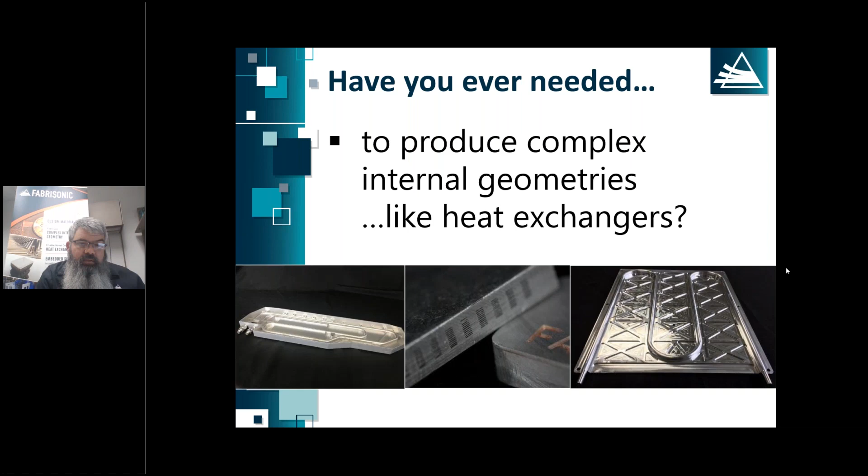There we go. The second thing that we do well is embedding electronics. Ultrasonic additive is different from many traditional 3D printing processes in that we don't take a metal like a powder or a wire and melt that. We're actually taking thin metal foils. The foils are on the range of about 5/1000ths of an inch, and we weld those together at room temperature using a process called ultrasonic welding.

Ultrasonic welding is not a new idea. It's been around since the 1960s. Early on, it was called wire bonding in the electronics industry. What we've done is taken that 1960s technology that used maybe 50 watts of power to weld small wires in electronics, and we've scaled that up to about 10,000 watts so that we can weld thin films layer by layer to produce three-dimensional shapes. The beauty of using ultrasound is it's a solid state process.

That means there's absolutely no melting. In fact, most of the parts that you're going to see throughout the presentation today never got above, say, 200F. So the lowest setting on your oven at home, that's as hot as these parts ever get, and only for a very short time. At any given point in a 3D build, we're only seeing that temperature for, say, 100 to 200 milliseconds as the welding device is rolling over the surface. Because of this low temperature, it allows us to embed pretty much anything in solid metal parts.

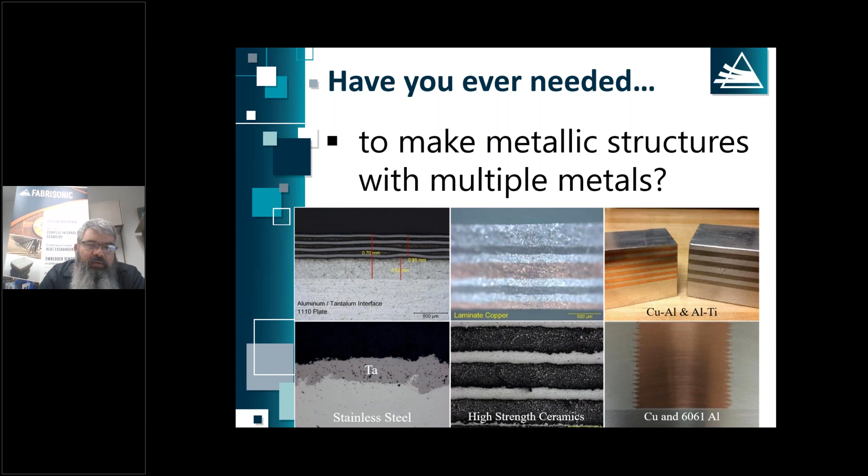If you can name a fiber, we've probably embedded it for someone. Carbon fibers, basalt fibers, S-glass, you name it, it's probably been embedded. But the idea is to make a metal matrix composite. And just like any polymer-based composite, we can play games, 0, 30, -30 to build strong laminate structures. So those are some of the highlights of what the process really excels at.

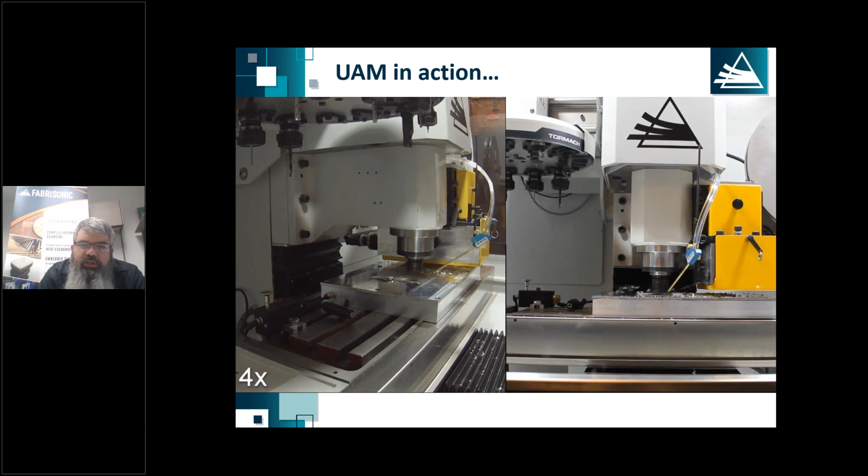Now I'll show you a little video of the process in action. As I mentioned, all of our systems start off as a CNC mill. Here we're milling away some material. And in our process, a majority of the time, we're starting with some pre-existing feedstock. We don't necessarily have to print the entire part. Customers bring us castings, customers bring us weldments, and we start printing from the feature that requires 3D printing.

So we may only print 30 or 40% of the part, but that saves us time as 3D printing is kind of slow and expensive. Printing just the portions that need 3D printing really helps speed things up. Now, underneath that yellow box, you see a little cylinder rolling. That cylinder is actually the welding device, and I'll explain that in more detail later.

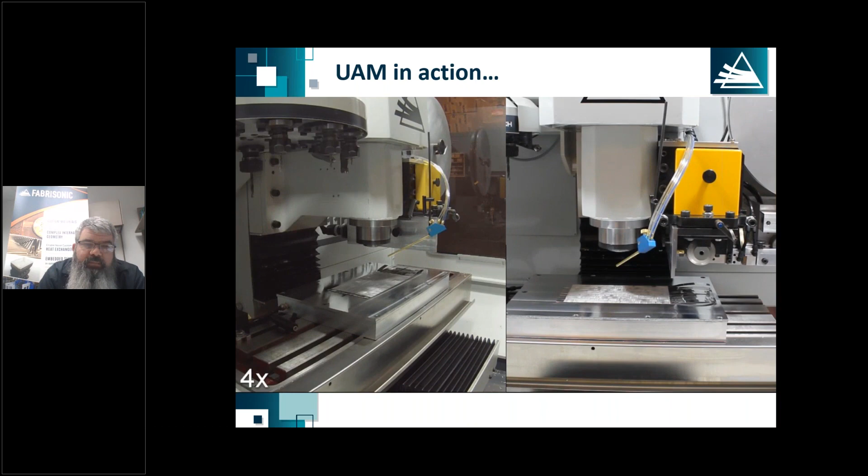But as that roller is rolling over a thin film of foil, again on the range of 5 to 10 thousandths of an inch thick, it's welding down that metal foil, fully dense, 100% metallurgically bonded metal. We repeat this welding over and over again. Again, we print near net shape, so we're printing kind of boxy structures that are close to the shape we want. And we derive all of our geometry specifically from the CNC milling. So from time to time, we'll stop, switch over to the mill to create the geometry as we build up layer by layer.

Again, all of the UAM systems are based off of a CNC mill. So we can choose different size mills depending on the product that we're trying to build. Our largest system right now in-house is about 6 foot by 6 foot build envelope by about 3 foot. So we can make some fairly large parts. We've had some customers that have put our welding devices on other motion systems like robots, fiber placement machines. So the scale of the process can be quite large.

From a deposition rate, when you look at some of the powder-based processes, you hear numbers of say 1 to 4 cubic inches an hour of volume. We're printing more on the order of 40 cubic inches an hour. So it's a little bit faster, but we would never call it fast. It is still a fairly slow process.

Again, for many of our parts, we'll start with something that's already existing and add material to it, to kind of leverage that ability without having to spend the money to print the entire part. And again, most of our machines are CNC mills and typically 3-axis, although we've done a few customs that have a few more axes to them.

So a little bit on how the process actually functions. Again, the idea of using ultrasound to weld metals is not new, derived in the 1960s from some electronics, wire bonding they called it. What we have is an ultrasonic horn, that's on the left-hand side here. And that is an acoustically tuned device that's meant to vibrate specifically at, in this case, 20 kilohertz.

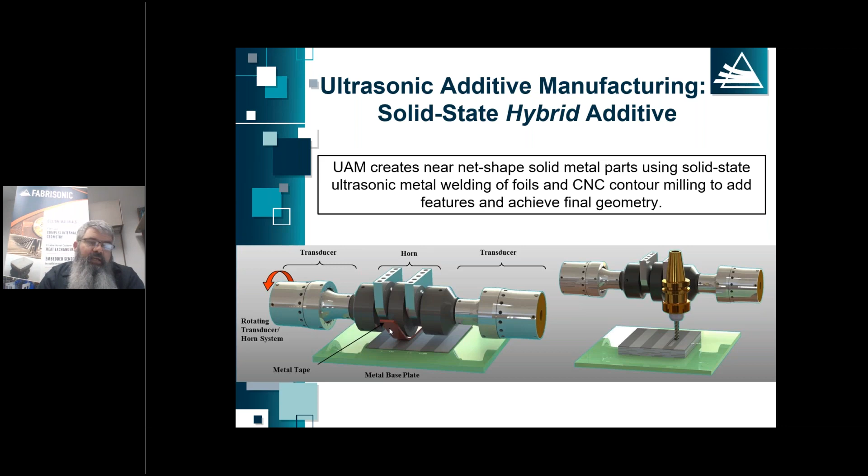On the right-hand side, we have depicted a CNC mill. Again, from time to time, we can come in with the mill and create both the internal and the external geometry. Pretty much every surface in an ultrasonic part is going to be touched by a mill.

A little more detail on the bonding mechanism. We get a lot of questions about this. It's akin to other solid state welding processes such as friction welding and explosion welding. But the general idea is metals like to stick to other metals. But down here on Earth, all of our metals are covered with an oxide layer. So if we take two pieces of metal and slam them together, what we're really doing is slamming together two thin layers of oxide.

The idea with an ultrasonic bond is to remove that oxide. So we're taking that welding horn, vibrating it left to right, and that's scrubbing the microscopic ridges and valleys on those metals. It turns out that most metal oxides are very, very brittle. So that scrubbing motion basically grinds away the oxide layer, kicks it out the side, and we have virgin metal on virgin metal. We apply a little bit of pressure, a little bit of force, pushing those asperities together, and we get a solid state bond.

Now, certainly there's more to it than that, but that's the general idea. We're scrubbing to get rid of both the oxides and any contaminants. That exposes virgin metal on virgin metal, allowing us to get a solid state bond.

To build up a three-dimensional shape, we take these thin metal foils or thin metal strips, and we lay them up kind of like in a bricklaying pattern. Certainly, we don't have to do that. It's kind of a belt and suspenders approach to make sure that if we lay a tape in the wrong place, our bond lines aren't all in a vertical seam. We lay those up in a bricklaying pattern to build up a solid three-dimensional shape. Again, all of the geometry is going to be derived finally from CNC milling. So we're printing close to the shape that we want, and then milling to the final shape.

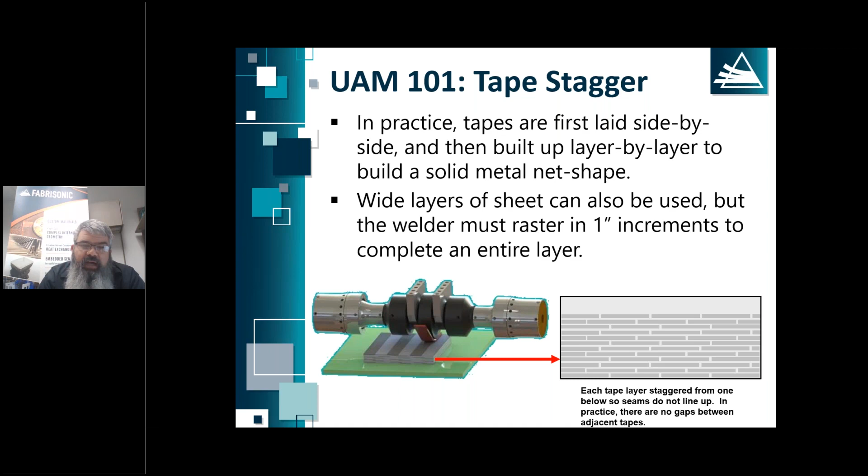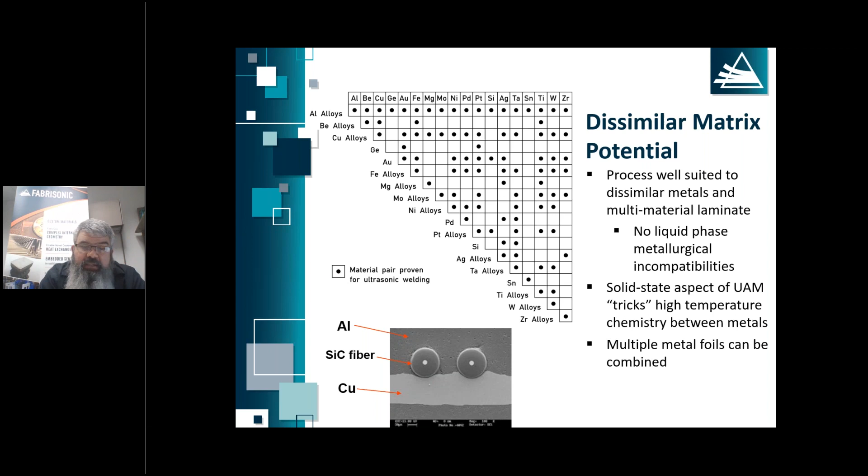So the welding process works very well to weld metals to metals, but it does not weld metals to non-metals. So anytime we're working with some sort of non-metallic, we're going to embed that. And when I mean embed it, these fibers were actually just laid on top of the copper and we welded an aluminum layer on top. And you can see we've extruded metal all around those fibers. Under a high power ultrasonic field, metal flows very easily, so we can extrude metal around things that we're embedding.

Looking at more along the lines of custom materials, we see some gradients here. The titanium aluminum gradient is heavier in aluminum on the top and heavier in titanium on the bottom. And this was actually designed as an armor product. So we're engineering a material with a variation in the material properties through thickness.

Below that on the left, we have copper and stainless steel. A lot of the thermal problems that we get involved with involve copper to wick heat away, but a lot of those devices tend to be stainless steel. So the ability to mix stainless and copper kind of at will in a design to wick heat away is important. In the center two images, we have aluminum combined with Invar and aluminum combined with moly.

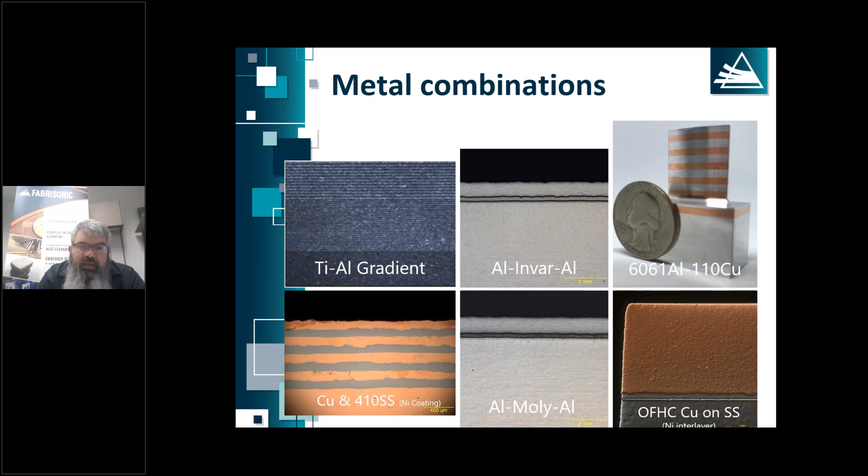So there's a wide array of materials that can be engineered by 3D printing to get the exact properties exactly where you need them. We've done variations in modulus, variations in CTE, variations in thermal conductivity, all within the same part.

And just like any other composites, metal matrix composites built this way follow the rule of mixtures. So we can easily calculate performance based on traditional composite theory. The only thing is our matrix of aluminum is 45 KSI and our fibers are maybe 200, 250 KSI. So you can make some fairly high performance materials.

So we talked about embedding of sensors into solid parts. And again, I'd say this is a large application space for the UAM technique. Typically, we're trying to do either health monitoring, or if we aren't doing health monitoring, we're probably trying to calibrate someone's model. By being able to get data in a very specific location and feed that back, we can calibrate people's models. All the models kind of have an analytical equation with three unknowns at the end.

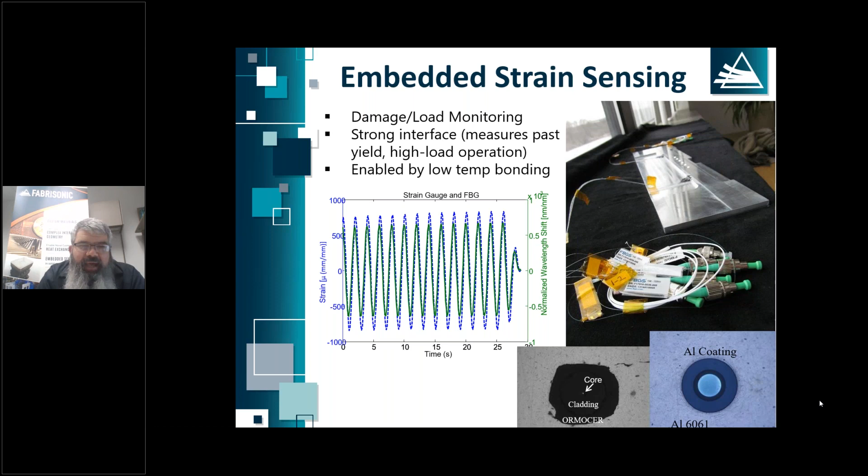We find that we can typically hold good high quality data till 2 or 3% past yield of the underlying base material. So you can get data past yield, but certainly there are limits.

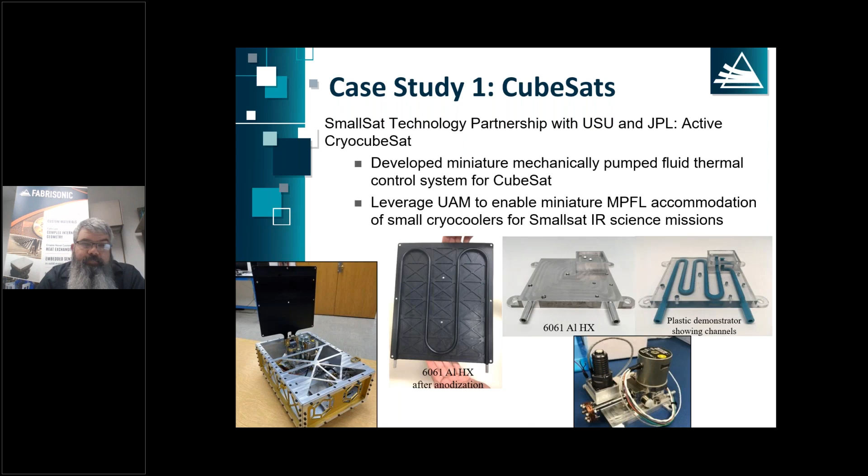Just to show you an idea of how this type of part is made, this is a separate cold plate, but it's the same general idea. For the most part, we're starting off with a piece of billet. Again, we only 3D print those features that need it. We print a little bit of material just to get our process established. Then we go in and mill the internal channels. Now, this doesn't have to be a single layer of milling, but in this particular example, we have one layer.

Like all other 3D printing processes, we have a need for support. When we're welding, we're pushing down with a fairly high amount of force. So any channels wider than, say, about 1/4 of an inch, we're going to fill those channels with a water-soluble support material that's patent pending with Fabrisonic.

We then mill that to get a nice, flat, even surface. And then we continue to print metal foils layer by layer over top of those channels to fully encapsulate those. When we get done with all of our printing, we come in with the mill to get the exact geometry, in this case, an isogrid that we're looking for on the outside of the part.

Just to give you kind of a range, these parts here were helium leak check tested down to 10⁻⁹ standard cc's a second of helium. So that's kind of space flight qualification numbers. Burst pressure tests on these parts were about 3,000 PSI, and operating, I think, was only about 200, 300 PSI.

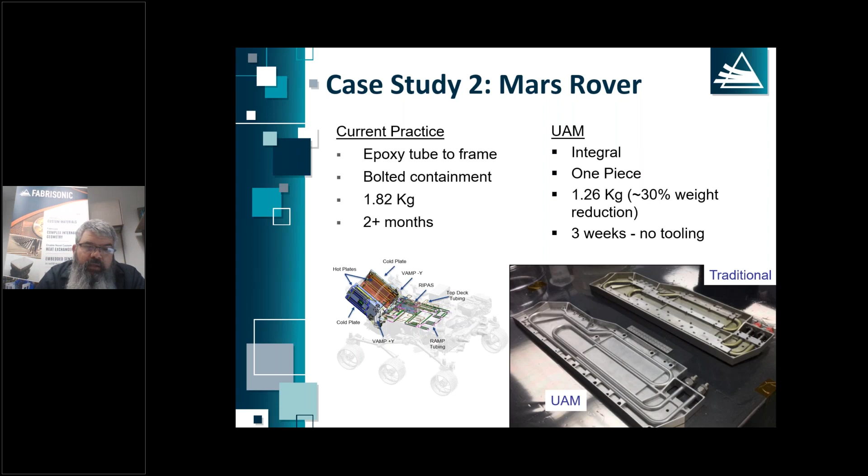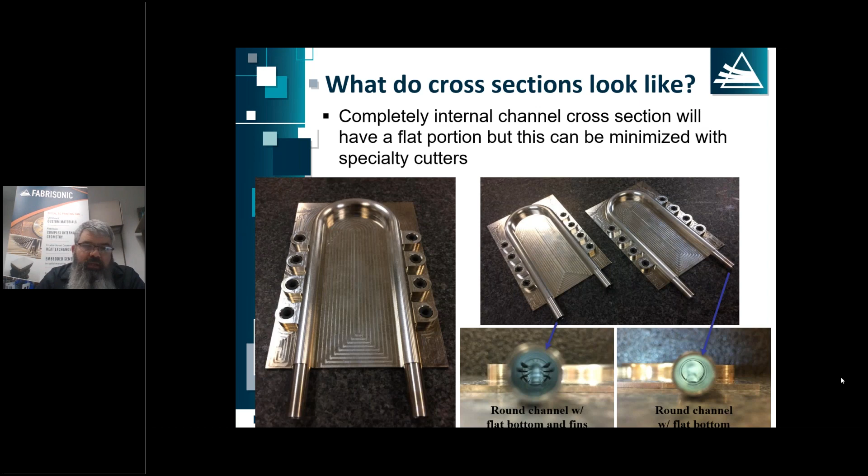So from a design perspective, there's always things that can be done to change cross-sectional areas, insert fins, insert turbulators, all those type of activities that people might be doing with other processes can be done just via CNC milling as opposed to some sort of powder-based printing.

Another area we do a lot of work in is larger heat exchangers. Here we have pictures of a heat exchanger that's about 5 foot in length. We've done some larger ones that we can't show. And I would say, one area of real interest for us right now is combining additive processes.

So a powder bed system may be great for making organic bone-looking structures that are really good right at a place where you're trying to pull heat out for getting really high surface areas in something like a vapor chamber. We've combined powder bed processes to create those very fine structures that really aren't a sweet spot for ultrasonic additive. We've printed those on powder bed and then used UAM to embed those in much larger heat exchangers. So I guess the idea I'd leave with you is we don't have to print all of one part with one process.

We're doing work where we're combining UAM with DED processes, with powder bed processes, as well as cold spray processes. And it's really about using the right tool for the right feature. I think 10 years from now, just like we have a mill, a drill press, a lathe, you're going to have an arc DED with a powder bed with a UAM system, and you're going to use those processes that are best for a particular feature, combine those to make a complex 3D printed part. But I'll get off my soapbox.

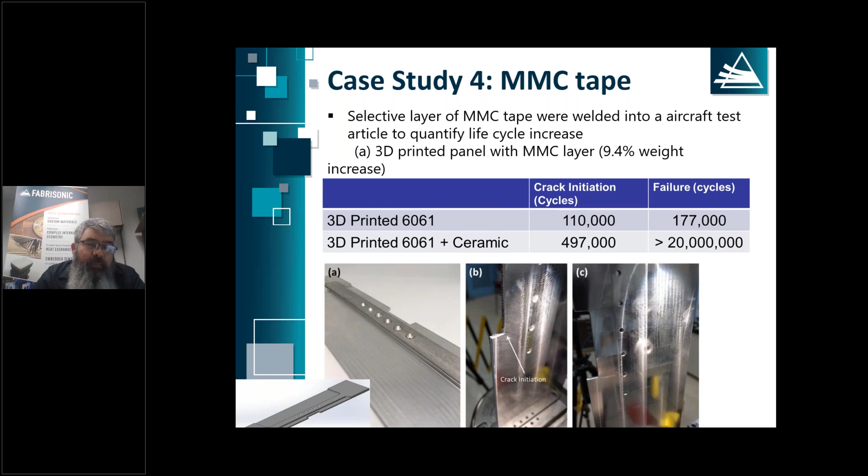The monolithic printed 6061, we started seeing cracks at 100,000 cycles, and we had two parts by about 200,000 cycles. But by adding just a little bit of ceramic fiber, the crack initiation pushed out to about 500,000 cycles, and we actually ran out of test money at 20 million cycles. So again, by combining dissimilar materials in a very specific way, you can get huge gains in performance. And we do a lot of work with metal matrix composites, with very elegant designs, by using UAM to combine dissimilar materials to get a much more effective, more optimized structure.

We looked at this part already, but I wanted to mention it again just to give the idea of digital twin. There's a lot of activity at aerospace customers, aerospace OEMs, trying to understand and model physical parts and have an analytical copy of that part for testing and rapid evaluation. UAM is used in that space all the time. As I mentioned, you can embed sensors and then use those sensors to correlate a model. You can embed sensors in the actual physical part and watch the evolution of loading in that part over time, and then watch that in your model at the same time.

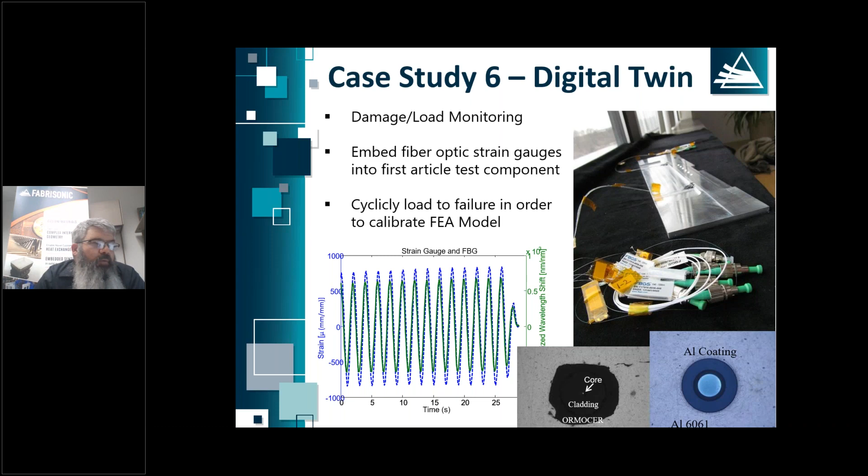So there's a lot of work that we've done, especially recently, embedding sensors in these parts so that we can get data throughout the life of the part while we're correlating that with some sort of analytical model over time. One example of that is what we call the sense pipe. This was some work for NASA.

They were interested in looking at both pressure and temperature fluctuations in a cryogenic fuel pipe while fuel is flowing to the rocket. So here we embedded some fiber optic sensors so that we could measure both strain and temperature along the length of the pipe and get some fairly high resolution data as the rocket is consuming fuel, measuring the changes in pressure and temperature as that cryogenic fuel is flowing through the pipe leading up to the rocket.

This same idea has been used. We've built similar type pipes for oil and gas, for nuclear reactors. Again, the idea is you can embed sensors in the ID of a pipe, OD of the pipe, and get data forever and a day from those sensors that are buried in a nice safe place inside the metal of the part.

Another similar example, this was another job with NASA Langley. They were looking at a drone and trying to correlate flight data with actual computer models. So here again, we embedded fiber optic strain gauges into a bracket for a drone. And we were able to collect true stress-time histories as that part was loaded in the field. And that data was fed back into the development of the model program so that we could get actual true strain time histories as the part was being used.

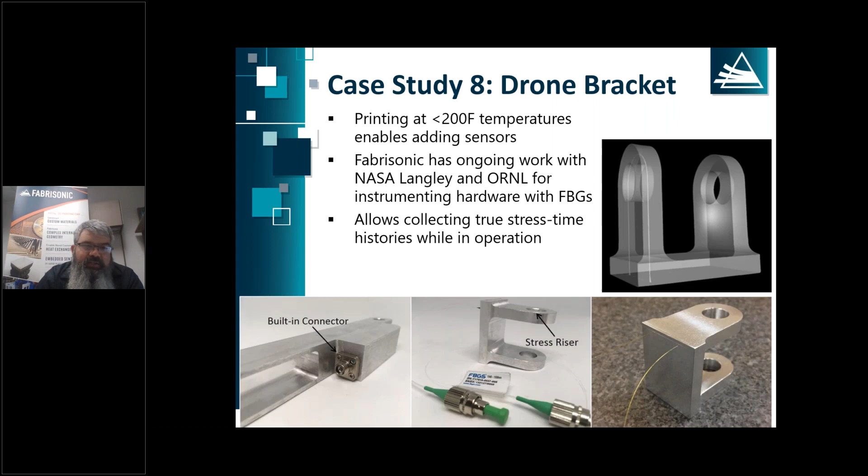All right, I think we're down to 2 more case studies here, and then we'll open up for questions.

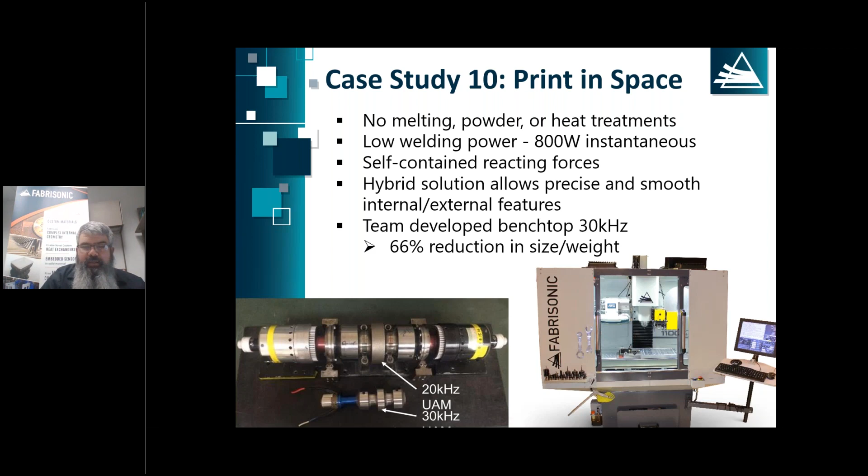The other kind of advantage of UAM for printing in space is it's self-contained. All of the reacting forces can be contained in the motion system, which allows for a very tight integrated system, again, without needing to handle powders or fuels or any of those feedstocks that may be problematic in space. One area that we've done recently, we're doing some experiments for NASA looking at repair of damage.

So let's say the space station or a satellite has debris damage. We were looking at, can we use this solid state process to repair holes? And we repaired a number of kind of pseudo holes all the way from 1/8 of an inch up to a 1/4 inch. We've actually gone larger now. And all of those repairs with just a single layer of foil were hermetic. Certainly, we weld more foils for structure, but just to get a hermetic seal, we only really need to weld 5/1000ths of an inch of foil over these damaged areas.

All right. Last topic, and then I'll open up for questions. We're also doing a lot of work with other additive techniques. I mentioned mixing powder bed plus UAM or Arc DED plus UAM to build complex parts. We're also embedding sensors for our friends. We have some friends that do a lot of work in powder bed fusion, and they're always complaining about bonds delaminating, builds delaminating, hitting recoater blades because something starts to deform.

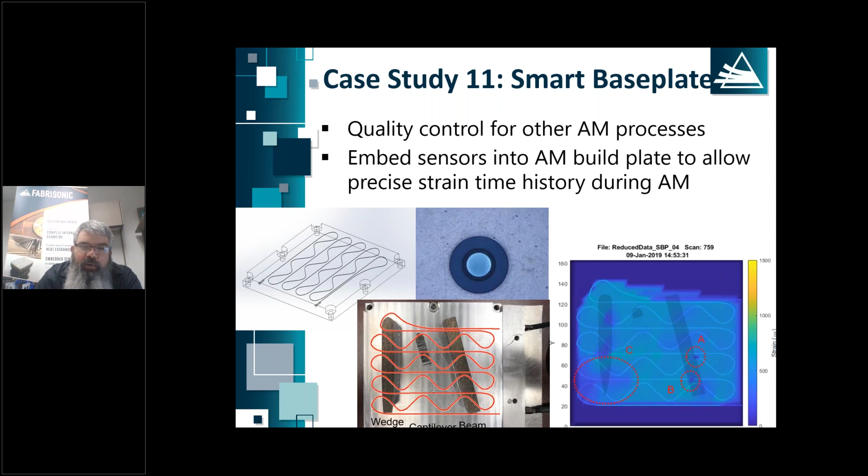And we said, hey, would it help you if we could embed strain and temperature sensors inside of your build plate so you could get data throughout the entire powder bed fusion process? And they said, yeah, that'd be a great idea. And here's a video from some work about 2 years ago. This is a custom powder bed system at Edison Welding Institute. But at the bottom, you can see some black wires. Those are actually our embedded sensors coming out of the build plate.

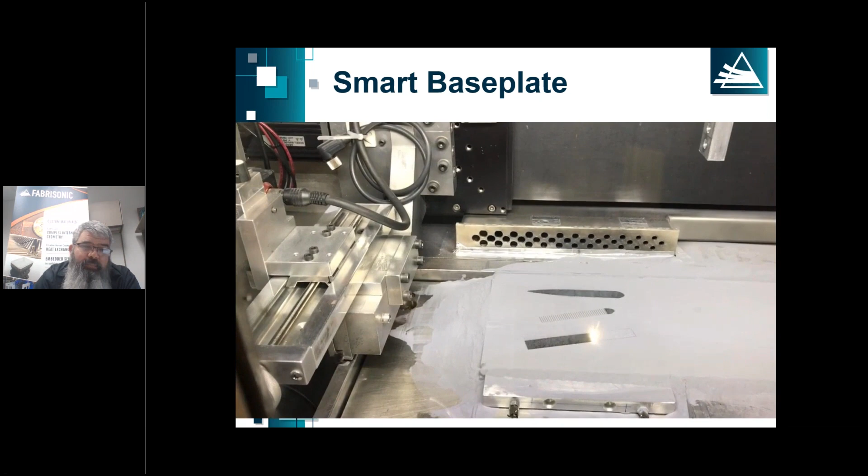So what we're trying to achieve is the ability to get both strain magnitude and direction, so the vector of the strain loading in this base plate while the powder bed build was evolving. We put a whole bunch of other sensors into build plates, but this is a strain-based build plate. You can see the strain evolve over time. And what we found is, magnitude is interesting, but the vector really pulls out if you have a defect forming in a powder bed build. If your strain vector at one point quickly changes by 70 or 80 degrees, something's happened from a strain state.

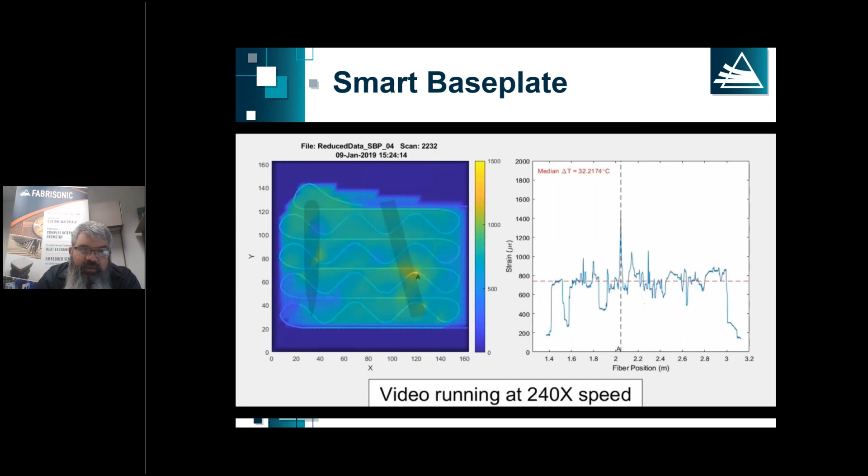So we're doing a lot of work on quality analysis and in-process build monitoring. But just wanted to give a shout out since there's a lot of powder bed people out there. So with that, I think I will open it up for questions. Again, ultrasonic additive: at Fabrisonic, we do research and development, short run productions, serialized parts, as well as sell these machines.

Well, thanks, Mark, for your great insight on this unique process, as well as AM process combinations. We have some general questions as well as questions a bit more application specific. And interestingly, one question had to do with whether you make assemblies for commercial 3D printers. You just touched on something along those lines with the build plate. And so there are applications beyond what some people might think of, space applications or satellites or things like that. Can you talk about some of the other areas and applications that people might not think of for this technology?

Yeah, actually, our number one application right now is in electrification. We can combine aluminum, copper, nickel steels, stainless steels, all in a foil type arrangement. And when you start looking at a lot of the electrification devices, especially some of the high current devices, being able to get multiple metals very quickly into a foil-based laminate has a lot of advantages for manufacturing these electrification devices, as well as thermally. A lot of work taking high power electrical systems and building thermal devices around them. So starting with a pre-existing part and building up thermal materials like copper and aluminum, as well as fin structures, around a pre-existing power electronic. A lot of work in that area.

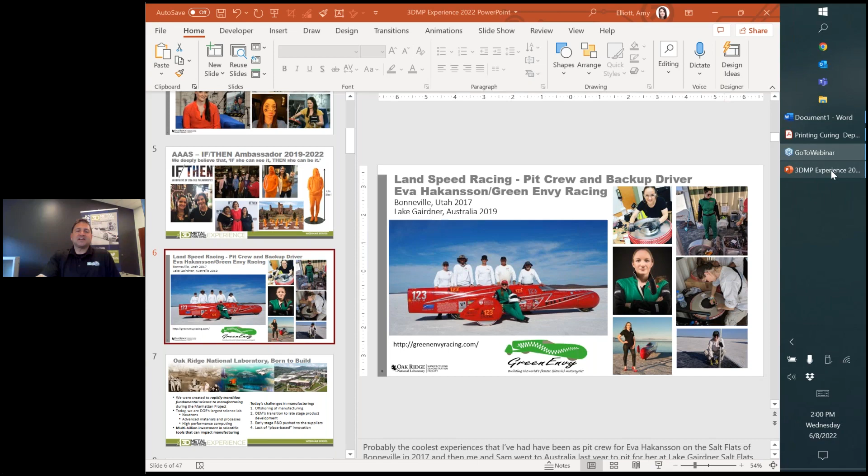Amy, I think you're muted. Thank you. Sorry about that. So I just turned my camera on and the internet went out, so I will leave my camera off. Apologies for that. I'm here traveling in a hotel, so I guess the internet's not that strong.

So yeah, during grad school, I got this opportunity to be on a reality show called The Big Brain Theory, and originally it was called Top Engineer. I would have never applied to a show called Big Brain Theory. Anyway, it was an engineering reality competition show. There were 8 episodes, 8 challenges, 10 contestants, and it's kind of like Survivor where people get eliminated. And anyways, once in a lifetime experience, and I say that because I'm only ever doing that once. It was so stressful.

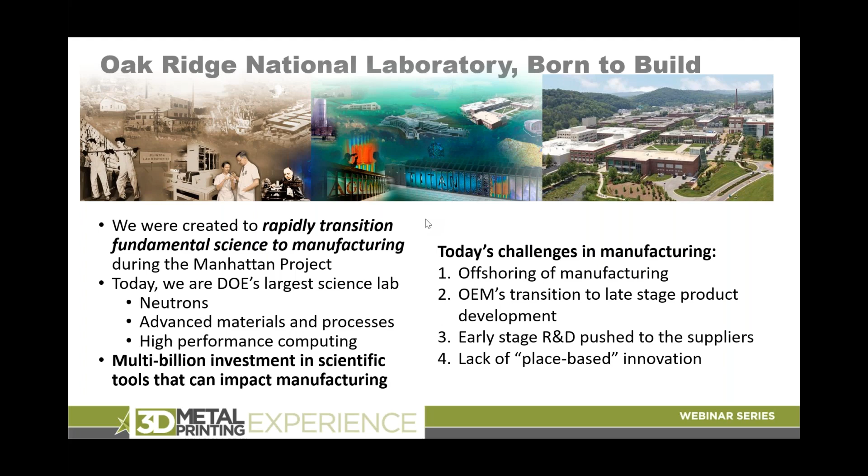So we have this kind of decentralization of manufacturing. So we're hoping to provide that place-based innovation. Specifically at Oak Ridge, we have the Manufacturing Demonstration Facility, and that's where we house a lot of our additive manufacturing. Although we have carbon fiber manufacturing and lots of other battery manufacturing, lots of other manufacturing capabilities. But at the MDF is where we do our additive manufacturing.

We got our start with plastic BAM. BAM is big area additive manufacturing. And you may have seen this demo. This is the Local Motors Strati being printed. It's a life-size car, and this was printed live at the IMTS trade show several years ago. Since then, we've printed lots of other things. The Shelby Cobra there is printed along with the house behind it, this pavilion on the center bottom, and then the wet sub there on the bottom right.

But the killer app for this technology, as we all know, the top 3 applications for additive are tooling. So probably the demonstration that's really gotten the most traction is this on the bottom left with the wind turbine blade mold. Wind turbine blade molds are massive. They can be like 60 yards long, and they take a really long time just to make the mold because they're made of layers of wood that are glued together and machined down, and they have to put all this copper wiring on there for the resistive heating.

And when we print them, though, we use way less material. It takes way less time because we're just printing that shell, as you can see. And then also, as was demonstrated in the previous presentation, we can add in any kind of heat transfer you want into the part. So there's actually slots right on the contour of that mold where you can shove in these reusable heaters and use that to heat the mold. So we saw some really great successes with the plastic BAM.

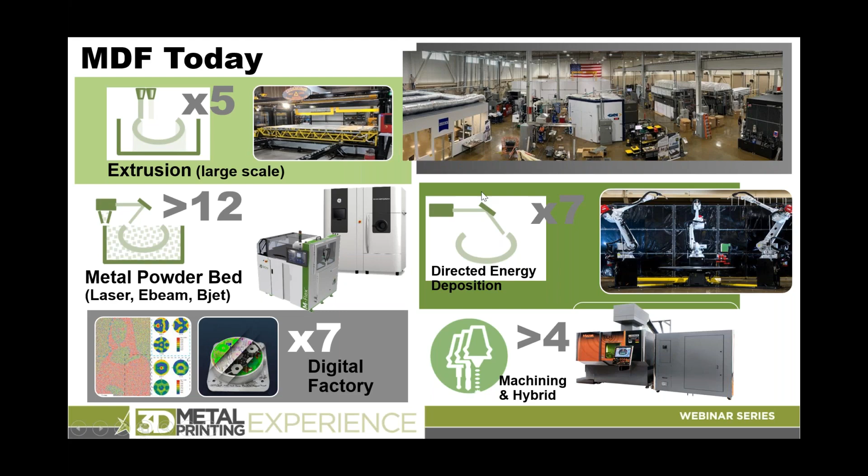So this is our facility. This is the high bay here on the top there. It's kind of like an ever-changing maze. We're constantly pulling equipment out, putting new equipment in, and it's definitely giving our facilities folks a run for their money. But anyway, it's a very exciting place to work.

So my area is binder jetting. Binder jetting is a metal powder bed process, and it starts obviously with a CAD model, and then the part is printed using inkjet. So we're not using a laser to melt that layer. We're actually just gluing that powder together with an inkjet print head and a binder. We cure that up, and then we depowder it, literally like an archaeologist, because the parts are kind of fragile. They have the strength of a piece of chalk. So we have to be careful when we depowder them.

And then when we've got them depowdered, we need to process them in a furnace just like a piece of pottery. So we can sinter them to full density with some shrinkage, or we can back infiltrate with a second metal. Typically we'll print stainless steel and infiltrate with bronze. And that's how we get our final parts. And there's a lot of advantages to binder jetting. The main advantage really is cost. The process is so fast and the machines are so much cheaper than like a laser or EB machine that the cost just comes out way better.

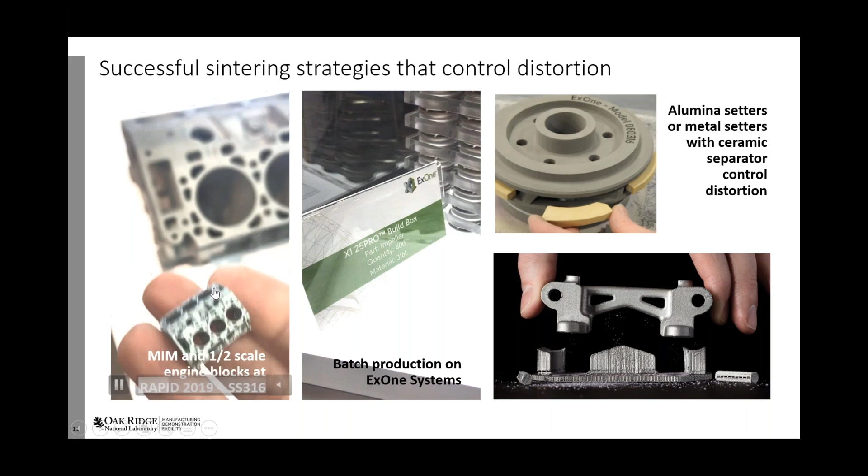So let me move this video, but this was at RAPID a few years ago. The process is very highly scalable. So this is a full size engine block there, and then a metal injection molding size, or MIM size, engine block. You can do large batches, and anyway, there's just a lot of advantage to binder jet, and a lot of work being done on the sintering side. So as we scale up, we need to evolve our sintering technology to accommodate for the distortion that we see. And so there are several strategies for that. One is these sinter setters that you can print in a binder jet machine.

You can print this alumina, you put it into your critical features of your part, and then as you sinter it down, those features are maintained by the setter. And then Desktop Metal obviously has the approach where they will print support made out of the same material that you're printing out of, and then they'll put an anti-sintering agent or like a ceramic between the two parts to keep it from bonding, and the idea is you can just pluck those parts right off. So lots of opportunity here in binder jet.

One of the demonstrations we did again was in tooling. We just find that there's a lot of low-hanging fruit in the tooling industry. Tooling is custom, it's low volume, it's high value, it's long lead time, it's complex. There's a lot of different things about tools that make a lot of sense for additive manufacturing. One of them is the lead time.

So typically when you're making a tool, you have to procure a billet of material that is bigger than the envelope of your part so that you can machine it down. And that procurement time can take a while, especially if it's a big tool. Well, with additive manufacturing, obviously we have the right billet every time. It's just a bucket of powder or a spool of wire. And so we can make whatever size part that we need with that. We don't have to wait on that procurement time.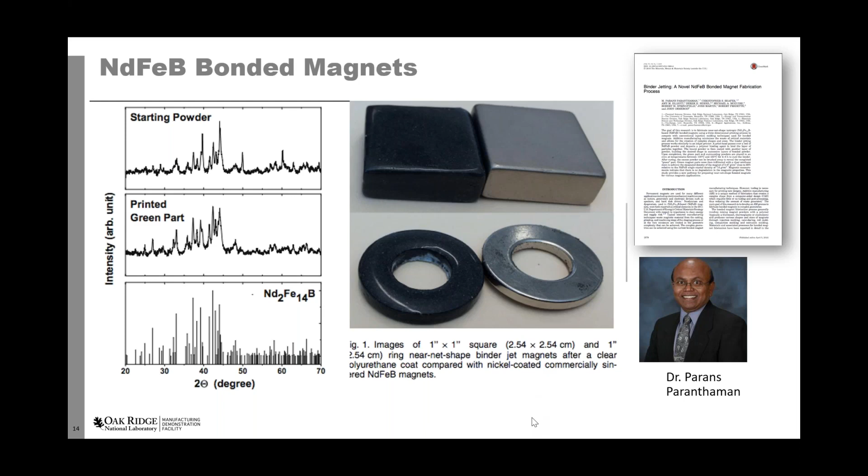We've also worked a lot on magnetics, so printing magnetic material and then plating that, and then studying the magnetic effects. So rare earth magnets and magnets in general, when they have to be machined, there's a lot of waste associated with that. It's not always recyclable. So being able to print magnets potentially could save a lot of those materials.

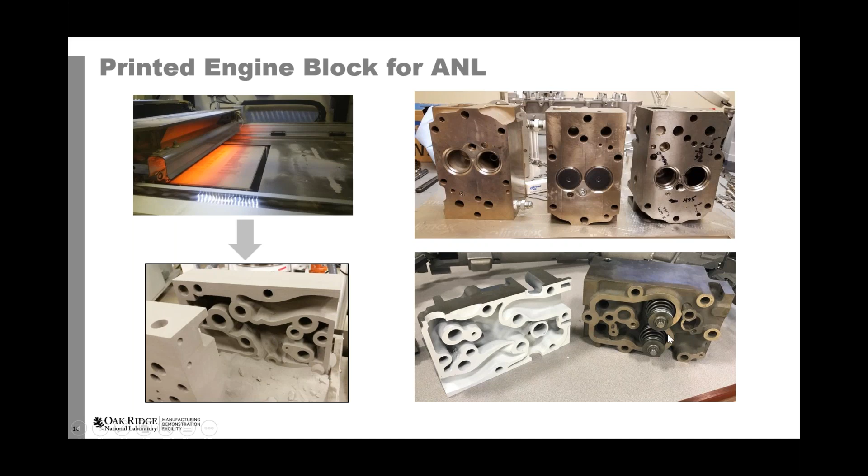And then one more demonstration on binder jet is this engine block. This is for a single piston diesel generator. I believe it's a Honda, and they had been doing some experiments. This is Argonne National Lab. They've been doing some experiments with different types of fuel injection and fuel spark plugs and that kind of thing, and they just needed a new block to do their experiments with. So we were able to cut the block in half, print it, depowder it, and then fuse it to one piece. And they're currently using that on their setup right now.

So one of the bigger topics I wanted to talk about, though, was this idea of manufacturing 4.0. So we know the first, I guess, era of manufacturing was just mechanization and steam power. Then we had the production and assembly line. Then we had automation, and now we have what are called cyber physical systems. So as we get more and more digital, we have more information about the products that we're building.

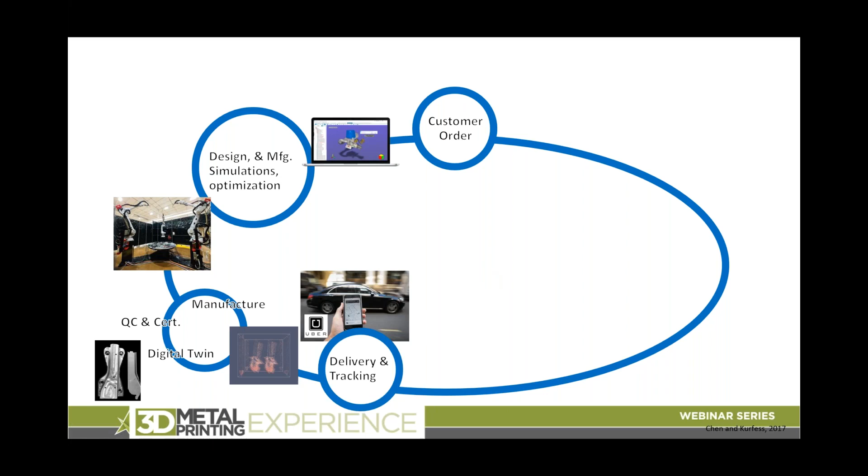And so the idea is that you get a customer order, and then you do your design and manufacturing simulation and optimization, not only for the product performance, but for the manufacturing itself. As you're manufacturing, you do your quality and certification. You can create this digital twin because you have so much information about the part. You can call in Uber, or your machine can call in Uber to come pick up the part and send it to your customer. And then potentially you can do this performance tracking and user feedback through the device itself.

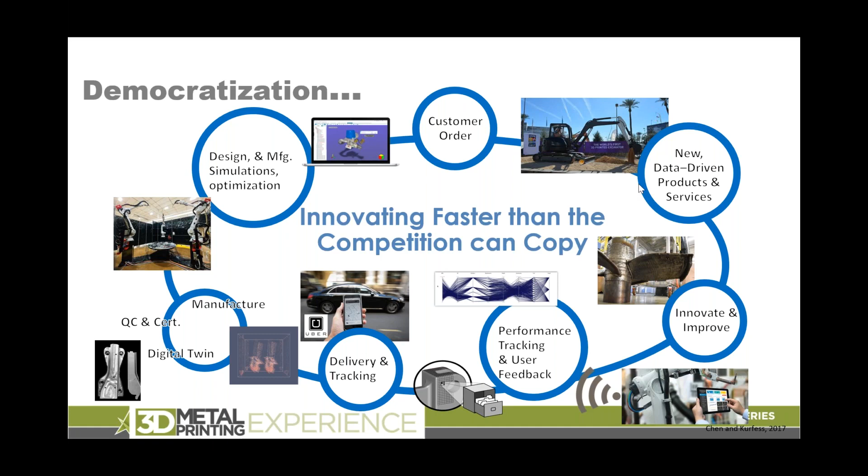So putting all those things into action with additive, you can use that to innovate and improve your product and offer these new data-driven products and services, which is what we call democratization. And the idea is that we are innovating faster than the competition can copy. So our efforts towards this manufacturing 4.0 are very focused on new systems. So I'll talk about a lot of the new metal systems that we have. So not only just new capabilities, but also investigating these hybrid approaches.

So on that front, this is our metal BAAM technology. So BAAM, again, is big area additive manufacturing. So these are any of the big printers. This is our first one. This is a partnership with Wolf Robotics. And this is a wire-fed MIG welder. We kind of make it look easy here, but the real trick to make this work, I don't know if you notice other people who are doing this, they may have to stop at like a foot of print if they're not doing this feedback strategy.

And that's really what makes this work. As you're welding, the welding process just really isn't very consistent, right? It's not really made to be a super smooth thing. And so as you're printing, you're getting a lot of deviations in that layer, and eventually that builds up to the point where you just really can't keep printing anymore. So what they do with this, and what was really the enabling technology, is to scan each layer and get that profile based on the scan, and then compensate the deposition based on that profile to even out the layer.

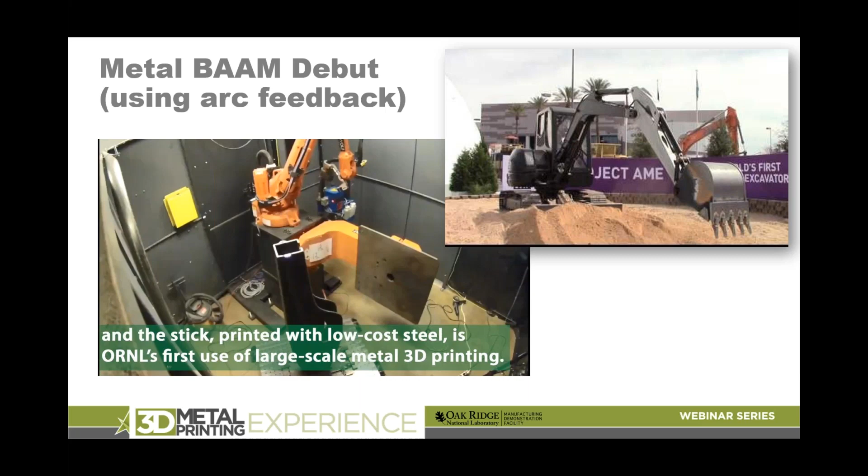And so this was that demonstration. We were able to print this excavator boom and put it on an actual excavator and dug around with it to demonstrate it, and it worked fine. We actually did plumb the hydraulics into the print. You can see here on the sides of that boom there. Didn't end up using it, but that was an interesting concept that we thought would be a cool demo,

because on these big excavators, on these big hydraulic machines, those hoses are actually one of the main failure mechanisms. They get ripped, they leak, they get caught on things, all sorts of things. So we thought that'd be an interesting demo. Just to the same point as the heat exchanger we saw earlier, it's very easy to embed these cooling channels or fluid channels into the parts.

And then one of the big applications for this are very large castings. So propellers are a really great example. Propellers for naval watercraft and just big watercraft in general. Those castings can take 2 years, literally 2 years, to make the pattern, make the mold, pour, cast, let it cool, machine it down. We think we can accelerate that to 6 months using this metal BAAM technology.

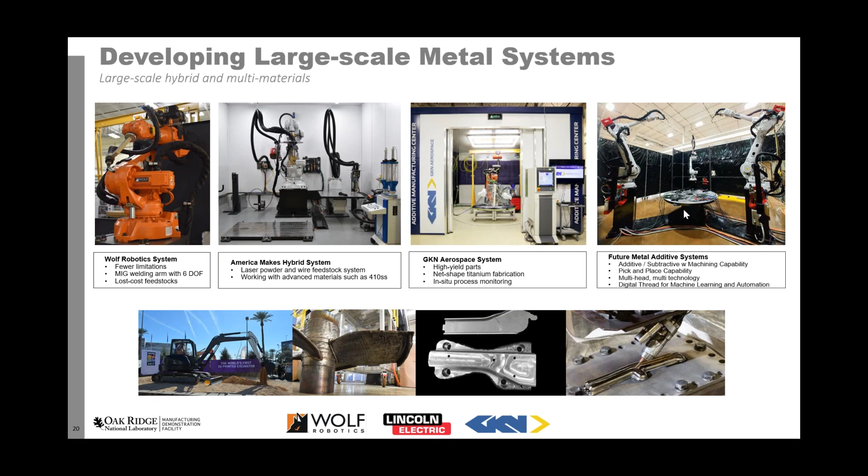And so these are all the different ones that we have today. So we have that Wolf Robotics system. We also have America Makes' hybrid system. This is a laser and powder and wire, so it can use powder and wire. And the GKN system, this is for aerospace. We'll talk about that a little bit more, but it's also wire, and it has a lot of in situ monitoring that they do for that. And then this one on the right, this is what we call Medusa. We'll talk a little bit more about that, but that's a wire feed as well.

More tooling demonstration. So this is just a basic stamping tool for a car chassis. And the demonstration is, you don't have to go, again, get this billet of material and machine it down and waste all that time on procurement and machining, right? Because you're having to machine down a lot of the billet.

You can just print this net shape and then machine down the money-making surface, and then use that as a tool. So they've demonstrated that you can print and machine this particular tool in 24 hours. It's worth about $3,000, and it was successfully used on a stamping operation. Since then, we've scaled up.

This is a B-pillar tool, and so this is actually one of the most complicated tools on a car to make a car. So this always has cooling channels that go up and down this tool because of how complex this shape is. They just have to have these cooling channels.

And traditionally, to build this tool, you have to cut it in. You have to segment it into many segments that are all machined individually, so that you can drill those cooling channels through the length of those pieces. And so you can imagine it's a very, very complicated tool. Well, when we print it, we can print the net shape. We can incorporate those cooling channels into the profile.

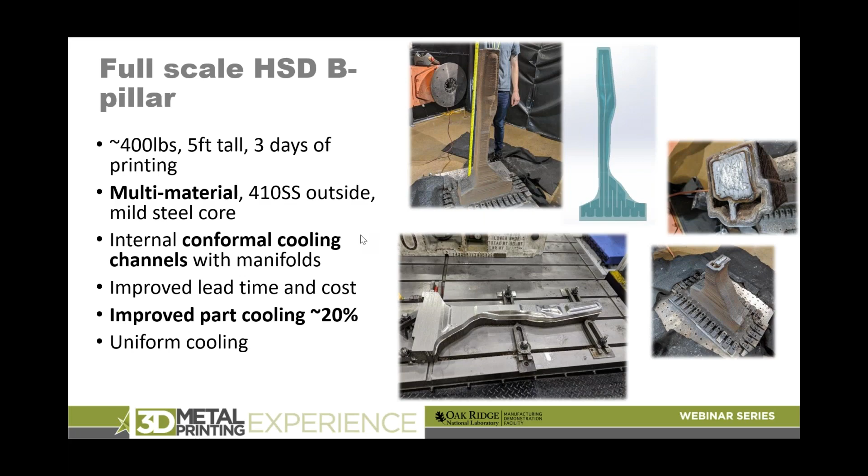That's something that always kind of comes as a surprise, but then not as a surprise. Not only can we improve the manufacturing of this thing, make it cheaper, we can also improve the performance. So that's always an added bonus when you're going with additive, especially for these heat exchange type situations.

So apologies, I'll turn that sound off.

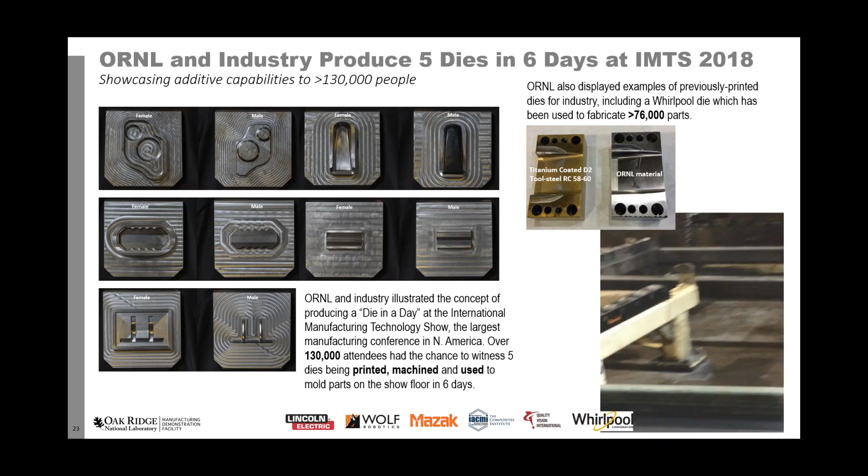But this is a demonstration that we did at IMTS a few years ago. It was called a die in a day, where we were able to print and machine down a die each day of the conference. And then here's one of those dies being demonstrated at a Whirlpool factory. And as of the last time we checked, it was still working. And so it's a great demonstration of how tooling and dies can really come back to the US and be something that's more on demand rather than one of the longer parts of the manufacturing startup process.

We had never done that setup before. So we had to go to the drawing board and figure out, how do we make this work with the tools that we have. I suspect that if it was a routine operation, we probably could have gotten that done in much less time. But nevertheless, about 3 weeks to make this whole thing, and they were able to launch on time, and it performed just right.

So the other added bonus of this is that we were able to reduce their buy-to-fly ratio. So buy-to-fly is how much material you buy versus how much material you actually end up flying. And so for typical aerospace, here it's 55 to 1. So you're buying 55 pounds of material to build that nose cone, but you're machining down 54 of those pounds. And so that's a really high buy-to-fly ratio. So we're able to reduce that to 3 to 1. We do that by printing that net shape and then machining it down just to the surface finish that we need.

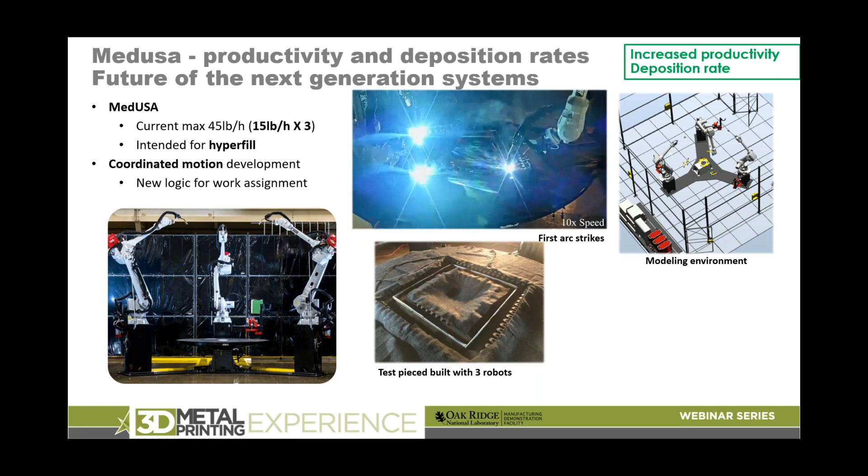And then one of the major science challenges here is the actual coordinated motion, the kinematics of the system, and how to get everything working together. And then also we'll be doing in situ monitoring.

So this is the hyperfill project. Basically, we're just trying to shove as many wires out of the welding nozzle as we possibly can stand. The more you do that, the sloppier the weld gets, of course. So we'll need that closed loop feedback to actually be able to weld consistently. But right now they're at 15 pounds an hour for one nozzle. And we are limited by the current hardware.

So we're really pushing welding technology to its limits. Welders are really not meant to put this type of material out that fast, or they're not meant to have this kind of throughput. And so we're burning out these nozzles. The shielding gas is just limited, and so we're working on kind of reinventing the wheel in terms of welders so that we can get to these high throughputs.

So this is the GKN system, and this one is built to 3D print titanium. It's a hot wire, it's got a laser, and it's pretty cool. The craziest thing about this one in my eyes is that you have to fill this whole chamber up with argon to weld this titanium. So it takes a lot of argon to do that. And then once you've done it, you're kind of stuck with what's in the chamber. So there's really interesting logistics around that.

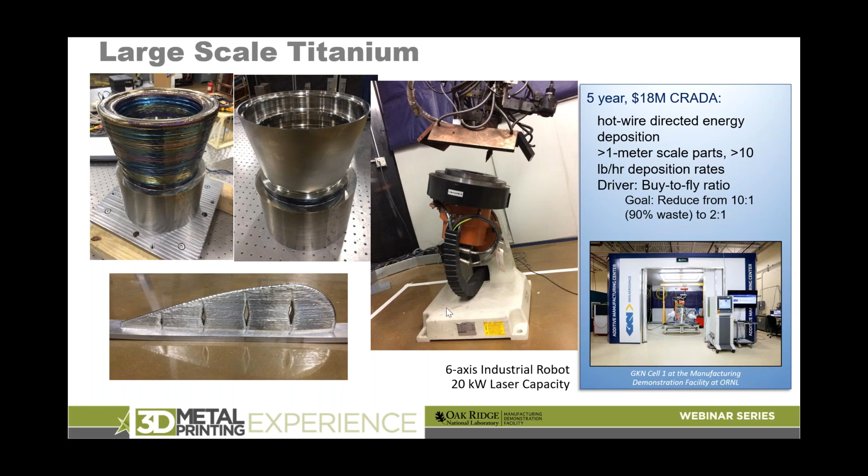But basically, the idea here is if we can weld titanium into large structures, we can reduce that buy to fly ratio once again. Titanium being a really, really expensive material and used a lot in the aerospace industry. And so we're studying how we're building up these titanium parts and then machining them down, and the performance from that.

Okay, so now getting into hybrid manufacturing. So there's a lot of different definitions of hybrid. The way we use it is manufacturing systems that have both additive and subtractive technology on them. So a lot of our hybrid systems are actual machine tools made for subtractive manufacturing that have then added an additive capability to them. So we have a lot of machine tools like the Mazak, the Haas, and the Okuma here. And I'll talk about those closer here.

But basically, the challenge becomes with so many different systems, there's just a lot of different kinematics to choose from. In terms of, do I turn the part horizontally or vertically? Does the part stay stationary? Do I move the actual machine tool around it? Do I have a robotic arm? How does my additive process work versus my machine tool? Are they on the same head? Are they separate? That kind of thing.

And so we have a whole slew of control systems scientists and machine tool scientists who are looking into these different system configurations and really trying to understand the effectiveness of each. There are pros and cons to each of the deposition processes.

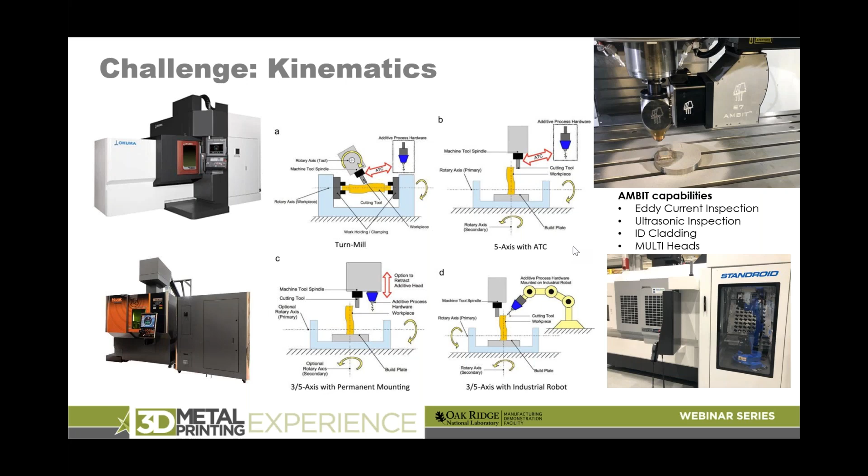With the wire welding, we see that we get much faster deposition rates and we can build much faster. But with the powder, we get much higher resolution. So it's really unclear which route is going to be the winning route. And they all have their pros and cons.

So this is a demonstration of the Mazak machine. So the study was to explore what are the benefits of doing additive and subtractive, swapping back and forth, basically. So doing some additive, then subtractive back and forth, versus doing a straight additive process followed by a subtractive process. So this is that demonstration.

What we found was that when we did just an additive process followed by subtractive in that kind of sequential manner, this operation took 20 hours. Well, if we did hybrid, like true hybrid, where we're making some and machining some, we reduced that to 6.5 hours. So you can see the two different parts there.

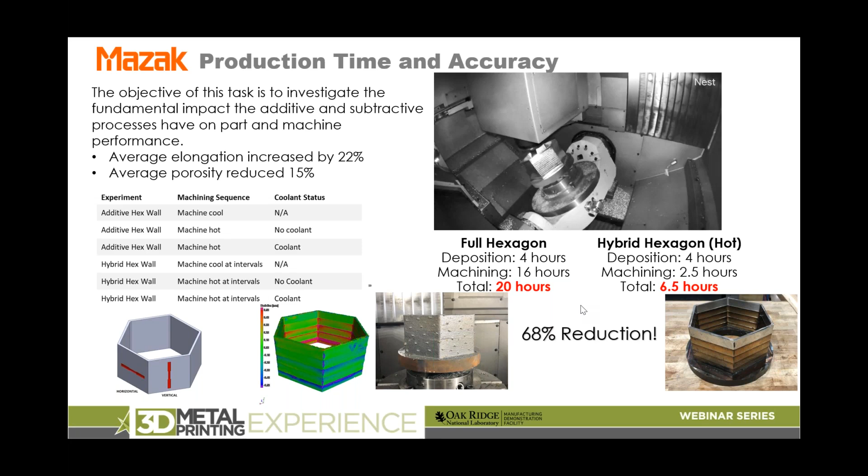And so anyway, we also see some differences in properties with this versus traditional machining. But anyway, it's a very, very interesting study to show just the exact advantage of doing hybrid machining. Okay.

And then another advantage, obviously, of hybrid manufacturing is, once you've made your part, you don't have to take the part off the machine and register it into another machine for subtractive manufacturing. The part's already there. You already have it registered in and you can start machining right away. That machine setup process can take several hours depending on the part. And it just seems like a complete waste of time if you can eliminate it.

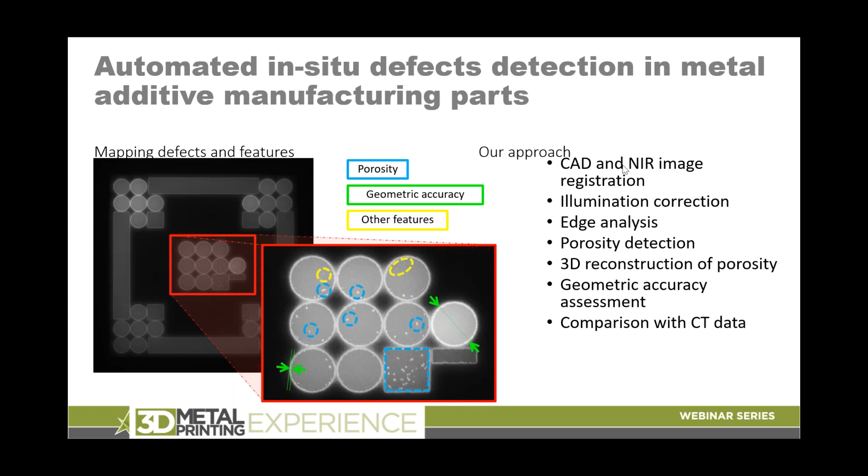And then using this type of data gathering, we can really gather a lot of information about the part itself. This goes to that digital twin. So we see here on the right the part as a bunch of these voxels, or these individual 3D pixels, little file boxes that contain a lot of information.

So it takes information from what we planned to make, what we modeled would happen, the monitoring, and then the post characterization. And all of that data can be used to train our AI. It can be used to inform our simulation even further, really creating this 3D data framework for additive manufacturing.

And then using that in conjunction with our process settings, as you can see on the bottom left here, we can really create this digital thread for additive manufacturing, where we've got the process settings, the simulation, and everything tied together to help us make informed decisions about the product that we're currently making.

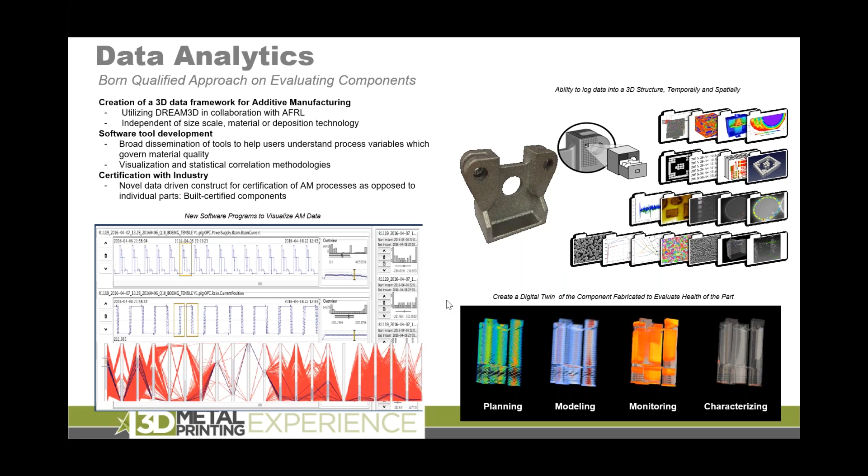So with our simulations, this has actually been one of the most enabling parts of our digital thread here, because we use simulation and our understanding of the thermal properties of how the things are melted in the print to actually learn about grain structure control. So if you're not a metallurgist, the quick explanation is, your grain structure is really what dictates your material properties, and we really care a lot about what our grain structure is. And so being able to control grain structure is a really big deal, especially on the local level.

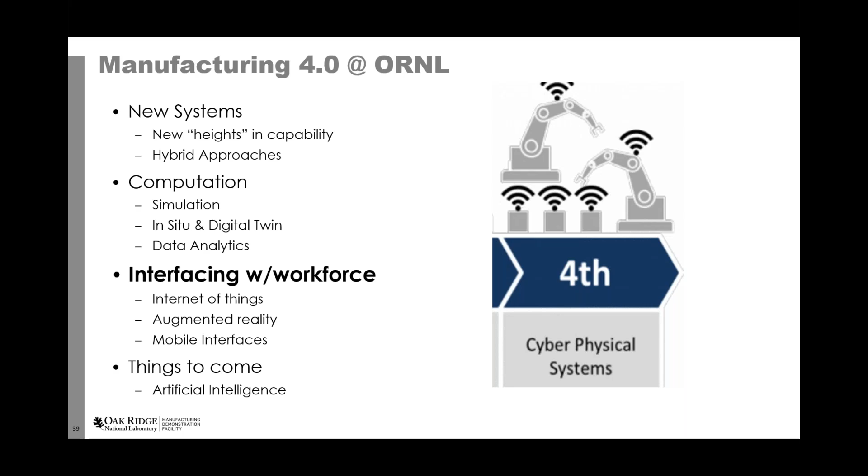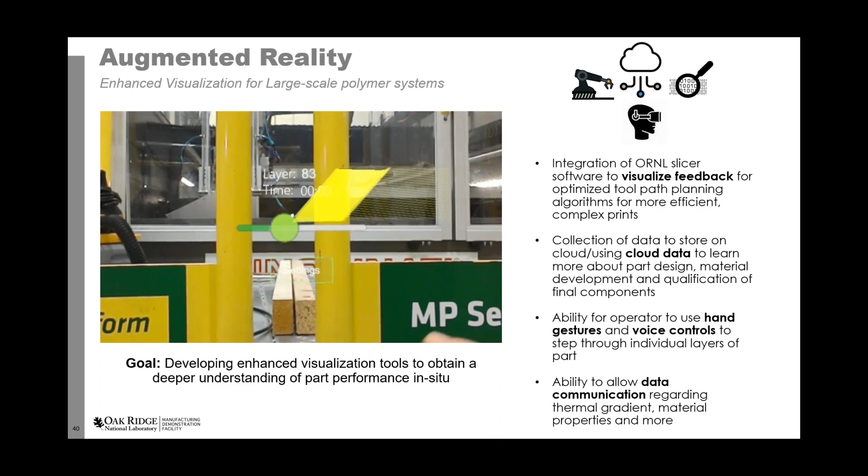In addition to our new systems that we're developing towards manufacturing 4.0 and the computation that we're using, we're doing some work with interfacing with the workforce. This is just a small demonstration that we did on one of our plastic BAAM systems. Sorry if you get motion sick, it might not be a good video to watch, but this is someone walking around with a VR headset, and they're actually able to interface with the machine, look at the build, what it should be, look at what it is, compare.

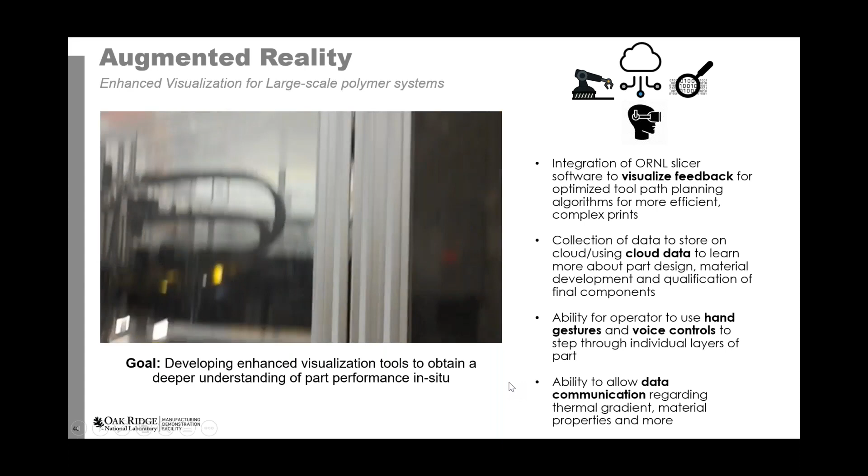And so the idea here is that we're taking some of the speciality off of the technician. So the technician doesn't necessarily have to know exactly what's going on. They can just use this augmented reality to check up on prints and make decisions potentially. So just a demonstration of how you can use hand gestures to work the settings. Voice control is also an option, and just communication with the machine in general using this augmented reality.

And one of my favorite examples of manufacturing 4.0 and the Internet of Things is an example that comes from Dr. Tom Kurfess. He was with us for a couple years, since gone back to Georgia Tech. But his example is he has this machine shop that his students use, and they have a bandsaw that is set up for soft metals and wood only. And so they have an issue with people trying to cut things they're not supposed to cut on this machine, and one of their student projects was to fix that.

So they're actually able to put a very low-cost vibration sensor, or just motion sensor, on the bandsaw, and actually were able to train their data acquisition system to determine what materials are being sawed based on the vibrations and sounds of the system, which is really interesting. And so using that connected with Alexa, the Amazon Echo Dot, they're able to actually have this dialogue here.

It says Alexa's telling Professor Kurfess that someone is cutting a steel with a hardness of 40 to 50 Rockwell C on the ME 2110 bandsaw. So Alexa's basically tattling, right? And so Dr. Kurfess is like, all right, send a note to my class, and send me a picture of the student, and ask them to see me in my office.

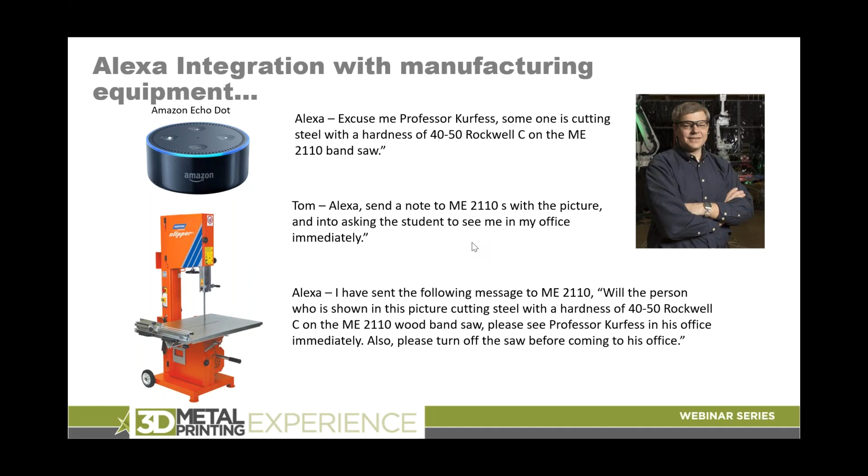And then things to come, we're working a lot on artificial intelligence for manufacturing, which basically means the machines need to deal with these small variations, small feedstock variations, environment variations on their own. So they need to be able to adapt and keep the process going. So they need to recognize what's happening and know how to adjust. And then after they adjust, they need to be able to verify that everything's all good again.

And then using this AI to track, so we're tracking information in the digital twin, and then also being able to flag abnormal deviations, or basically, hey, I don't know what's going on here. Can a human come and help me? So here's just some things that we see in the powder bed arena that we would like the printer to be able to recognize and also correct for.

So if you ever worked on a powder bed, there's a lot of things that can happen. One is incomplete spreading. So for whatever reason, your hopper's having a bad day, your powder's having a bad day, and basically you just didn't get enough powder into the layer. And you can have these little pockets of emptiness at the end of your layers.

You can get something stuck on the roller, or something scratching the roller, which causes streaking. You can get parts coming off, breaking, and then you can get debris from that. There's a lot of different things that can happen in the layer with the powder spreading that we would like to train the AI to do.

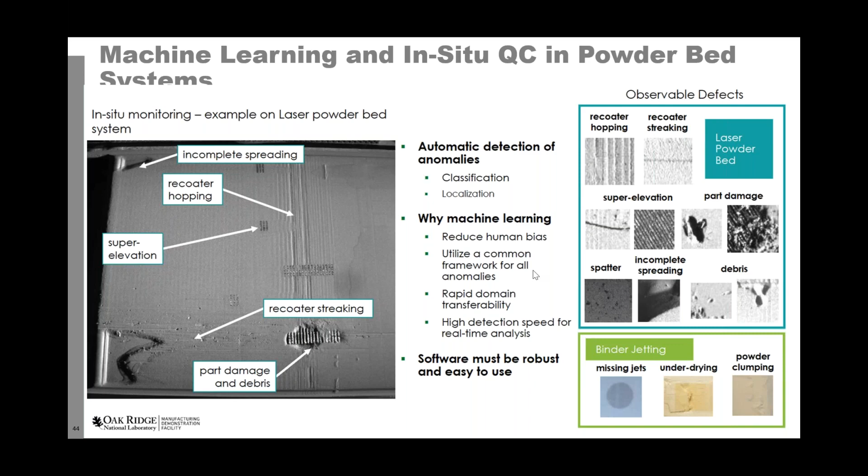So this is very exciting for my technicians, since they have to watch out for things like this, or when short spreading happens, we don't always know that it happens, and sometimes we have defects in the part, we're not sure what caused it. So very exciting. We're going to be adding more capability like this in the future. And then also using that layer data to reconstruct the print as it happened, to be able to register any defects and understand what we're actually getting out of the printer versus what we asked for.

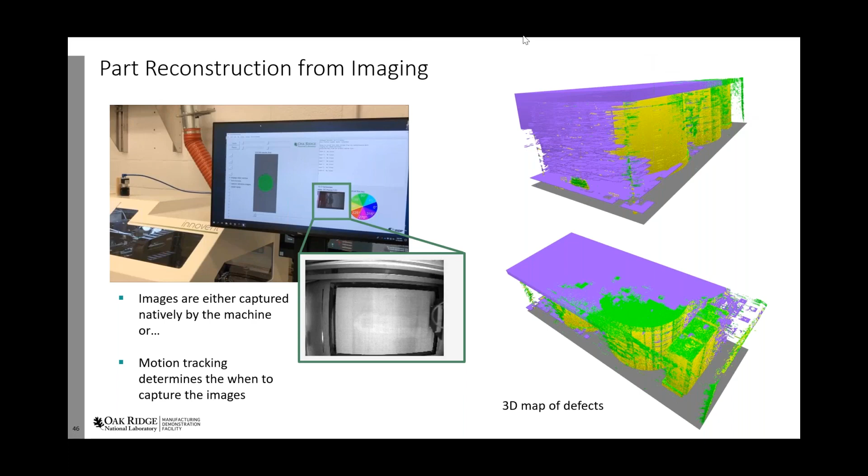Well, thank you so much, Jamie, for bringing us up to date on ORNL's extensive AM efforts and the related Industry 4.0 machine learning AI technologies that you're working on as well. We do have a number of questions, a couple right off the bat related to hybrid. Mazak, Haas, Okuma, DMG Mori. Why are there so many machine tool makers working in AM now?

Yeah, I think it's because there's just a clear advantage to the hybrid approach. Their customers and their users can now build parts directly instead of having to order billets of material and machine them down. It's just a real advantage to the whole manufacturing process. Mm-hmm. And now you're in the unique position of working on helping to develop these technologies and also using them.

For hybrid, are there any challenges you see out there with the process? I mean, is the machining part ahead of the additive part, or things like material contamination, how that's being dealt with? Are there some challenges that are still being worked on with this technology?

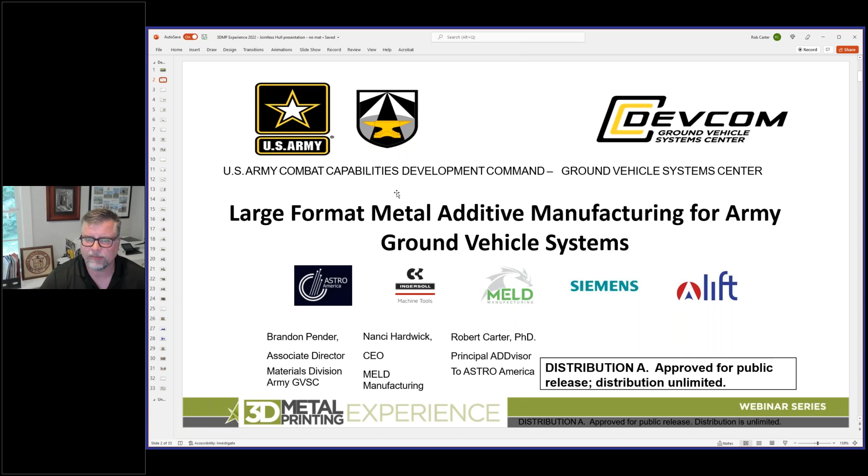So today's talk, as we were talking earlier, is large format metal additive manufacturing for Army ground vehicle systems. I will actually have to point out that this is a talk that's put together by Brandon Pender, Nanci Hardwick, and I've added a bit myself here, to be able to talk to what we've been doing in developing a new system that's being developed and stood up later this year.

So a little background: I want to start off from where we were about a year ago, give a little bit of introduction, defining what we mean by large scale additive manufacturing, and then where we're going in these processes, which processes work, which ones won't, and which ones are of particular interest. And then we'll kick into where we are today on being able to develop a subsection machine, what we're calling our hull scale machine, and then finally where we actually put the machines to work and do some printing.

So a little background. Everybody knows the Army uses combat vehicles. A number of them are actually made with aluminum, many are steel as well, and they've been central to protection technologies since World War II. As you can imagine, they use very large metal components: cast, forged, formed, you name the process, they use them all. Of primary importance in the past decade or two has been underbody protection.

In Iraq and Afghanistan, we saw a lot of issues, but if you actually trace back, underbody protection has been a concern since vehicles really started. An example of that is that the majority of all vehicle losses during Vietnam were actually from anti-tank mines. So this underbody threat is real, and we've got to find new ways to develop vehicles and do the manufacturing to improve the protection of the systems.

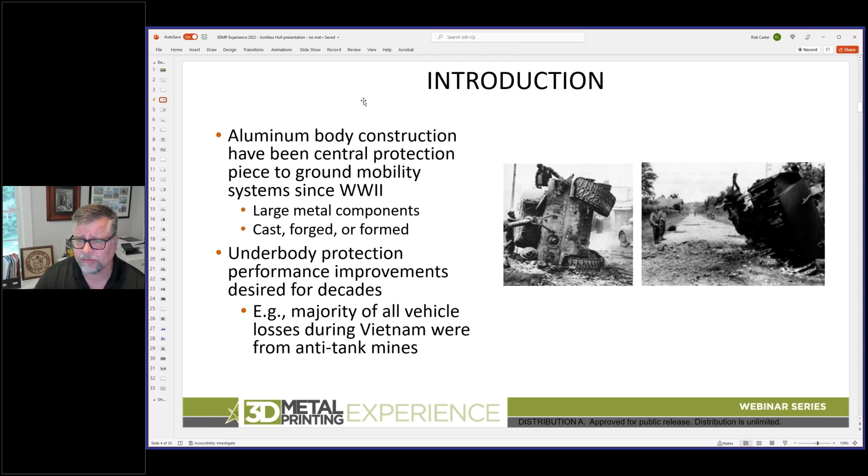So one of the things we looked into a number of years ago when I was working with the Army Research Laboratory was expanding that performance, especially the underbody areas, but we had to really start pushing the manufacturing systems. We were looking into thicker hull bodies and new design concepts, and many of these needed new manufacturing processes to enable them. Under one ManTech program, we looked into forging, forming, and newer, higher energy buried arc welding, welding technologies to allow us to do larger structures, thicker walls, and still be able to process the material.

The only thing that you run into is you still have some design limitations. As with any manufacturing process, the process capabilities and limitations impact the design. In forging, we were able to create the world's largest aluminum die forging. We were using a 50,000 ton press that resided with Alcoa at the time to stamp out a small swimming pool sized full combat vehicle hull.

As you can imagine, the die itself is actually one of the limiting process parts. It's very fixed. Once you carve your die, the die is cast. You're not making a lot of changes, at least inexpensively. So there's a tremendous sunk cost in developing the die set to move forward with a forging process.

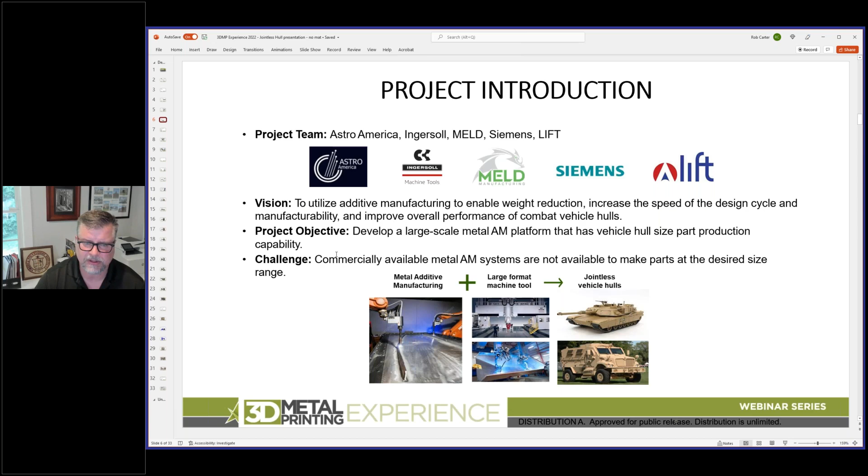So moving forward, why would we want to do this? As I kind of touched on, weight reduction. Many people understand how heavy combat vehicles get. Every one of them, obviously, the more weight they have, the more gas they burn, and we've all seen what gas has become recently. We also need to increase the speed and design cycle.

So one of the things I think Dr. Elliott talked about in the last talk was when you see, especially with large castings and forgings, those can take years to get into a cycle. We need to be able to short circuit that and provide a much faster time from design to manufacturability. So additive technologies provide a lot of promise in that space. We're really hoping that we can improve the overall performance.

And then the next thing that we really want to look into is whether you have a much more capable manufacturing process that can do multiple components or hulls, be able to service multiple platforms and even reach across services. So this is not going to be a stovepiped single production platform that really only feeds one component or one platform.

So as I was starting to touch on, we were looking for something that is commercial off-the-shelf technology to develop a machine that is 3 foot by 3 foot by 3 foot build volume. And then the real hook here is scalable to larger size. And when we say larger size, we're looking at something in the 30 foot by 20 foot by 12 feet.

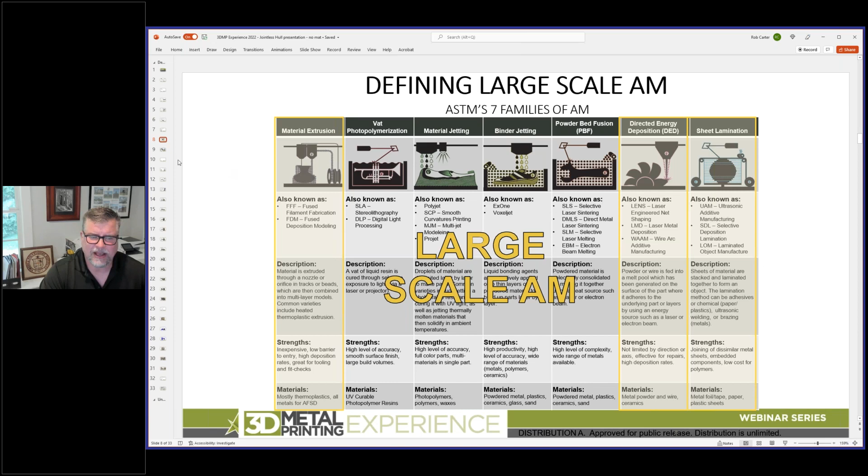Well, one of the things that we looked into was additive friction stir deposition. And what is additive friction stir? Well, it's somewhere living halfway between material extrusion and a DED type process. This process really looks into how do you take a bar of metal, have it being twisted, so it's rotating, and then pretty much smearing along.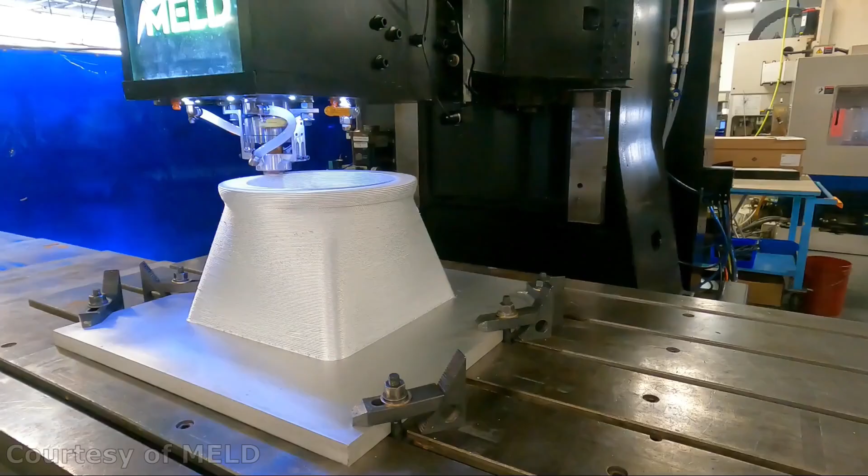So let me go forward and we'll try a video clip. And I don't know if Ali is on here or not. All right. So this is a video clip from MELD Technologies.

Rob, you're muted during the clip. Ah, okay. Well, my apologies. As I was talking way over here, talking about some of the nice features of it actually moving fairly quickly. We can go back to the presentation. So let me get back over. Is that showing just my screen or is it showing the full screen? That is showing your screen.

Okay. All right. So as I was talking, additive friction stir is a solid state process. There is no melting. This material stays in the solid state. It goes through severe plastic deformation. So you don't have the issues that you run into with a melt or a liquid-based process where you have solidification, cracking, hot tearing, or porosity issues. It also will allow in some cases joining of dissimilar materials. You can run the MELD process with two different materials to lay one on top of the other. There are certain relationships that need to be met for that to work.

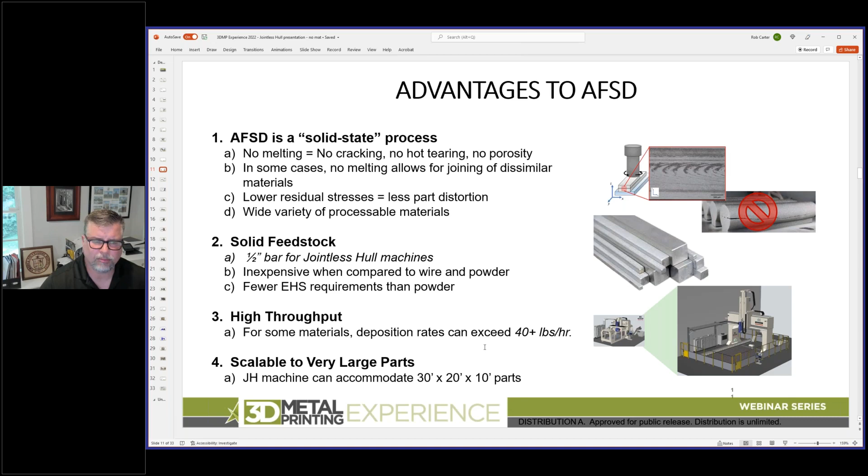Thin wall structures would require a lot of post-process machining. So from that standpoint, if you're going for large bulky components, yeah, this is looking pretty good. If you're going for finer features, we may have to look into other processes. Limited production capability. Well, there are not a lot of MELD machines out there right now. So there's a limited availability today, but then also the scalability.

If you're going to be making something in quantities much more than 100, that might be a little bit challenging. So we're going to be working on how we do the business case analysis and throughput on these systems. And then finally, the unfortunate part is the limited understanding of the material process property relationship. This really is a fairly new process. It is fairly scalable, so we've been very attracted to that, but it does not have as large a database as one would have hoped for both the tensile and microstructures that are generated.

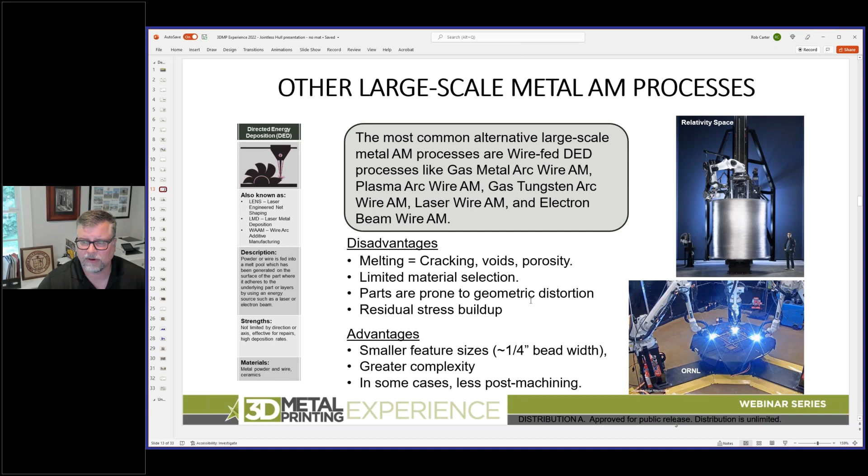All right, so I've been talking theoretical at this point. So one of the things that we're looking into is, how do you develop these 2 tools? So at this part of the program, 2 tools were desired. I'll say a subsection tool for looking at process parameters, toolpath, geometry, so a lab scale, something that can be used to prove out what is going to be done with a larger system on a much smaller, much lower cost, easier system to get into.

But both systems are built almost identically with their process conditions. So the thought would be that we would have the best transferability from one system to the next. So here are at least some concepts of the 2 parts, and we'll get into a little more detail. The smaller one, which we call the subsection tool, is going in at Detroit.

And this is going to have the 3 foot by 3 foot by 3 foot build volume. Actually, it'll probably be a little bit bigger than that, but the installs are beginning in June of this year. I'm not sure if we're still holding on to that as well as we would like. There's been a lot of supply chain issues that have slowed down some of the deliverables of certain key wiring harnesses, things along those lines.

But I've got some pictures to show where the machine is now and kind of its status of play. The goal is to have this operational later this year. So this is not something that's going to be months or years off in the distance, but just later on this fall.

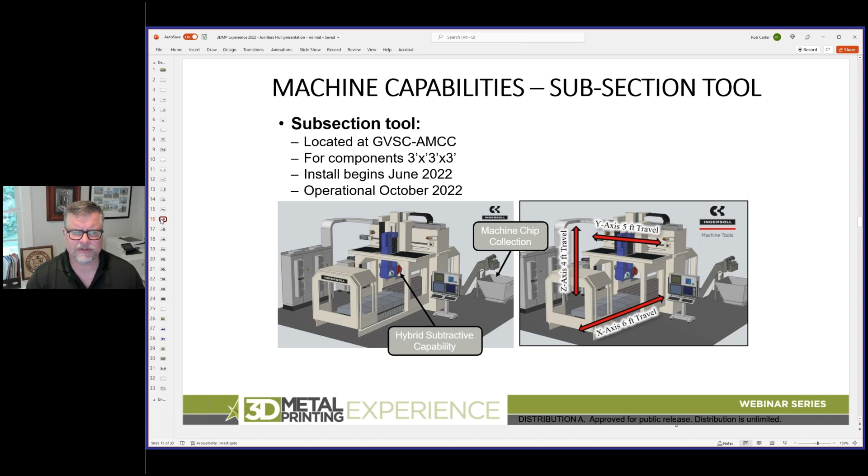So let's see, here's some pictures from earlier this year. So this is the system in assembly. You're seeing the back here, where the MELD head is going to be mounted on. This is the fixturing for being able to do your build volume, your base plate. So this system is becoming real very quickly. This is actually from a couple months ago, so I'd imagine much more has progressed from here.

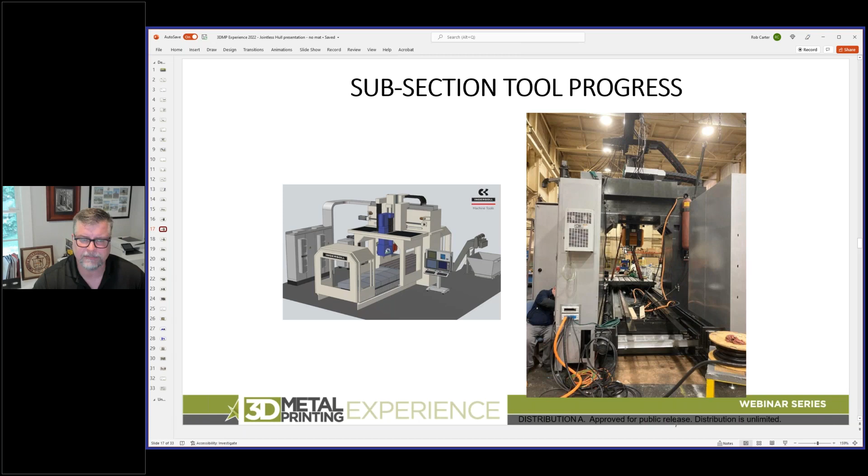Here is looking through the back of the machine, so you can see where the MELD head will come down, be able to access the system. Now, the other thing that's going to be interesting is that there is going to be a spindle here for machining. So this is actually a hybrid system. It's designed so that you will do deposition and then go back and touch up machine. So with this, we can also make sure that we're producing the parts. And here's our MELD head coming in. So it is now being assembled, and many of the MELD fixtures.

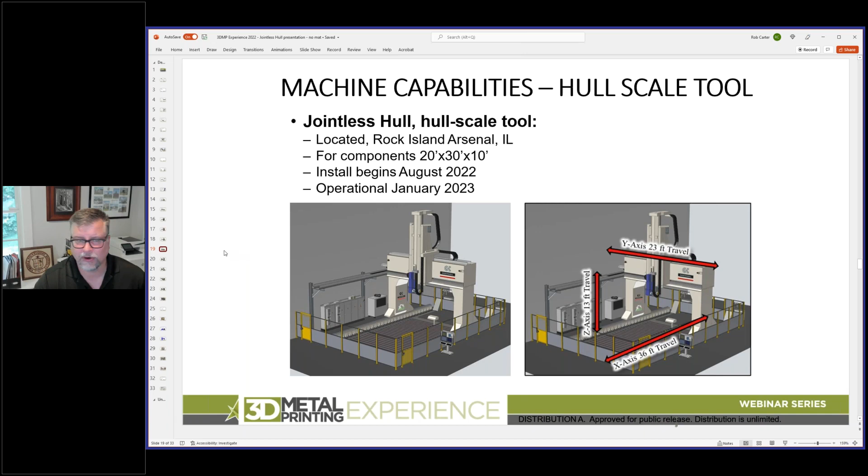All right, so for the large one, the hull scale tool, that one's being installed at Rock Island Arsenal in Illinois. The target build volume is 20 feet by 30 feet by 10 feet. The installation begins this fall. Operation targeting next year, again, pending some of the supply chain issues that have been occurring, where hopefully we can get around that.

All right, these pictures don't do it any justice. We'll get into a few here in a minute that will, but here is the central pylon that the tool and spindle will be placed on, and some of the mounting provisions that go with it. They're functional, and for anybody that has an opportunity to ever tour an Ingersoll facility, I encourage it. It is an engineering playground. They work on things of such huge size. You'll see here in a second.

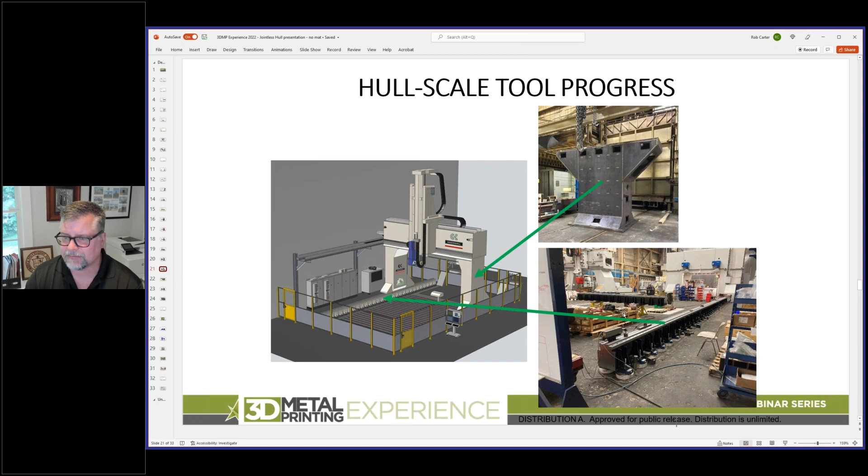Anyway, so here are some of the different supports and pylons. The rail system that will go into it is being assembled. So you can see this now is starting to take a little bit more shape. Here are your 2 rails that outline the size of the bed. Here are the 2 support columns that are in. Now you're seeing, here's the crossbeam. And to give you some perspective, I believe he's 6'7". So this is not a small piece of equipment.

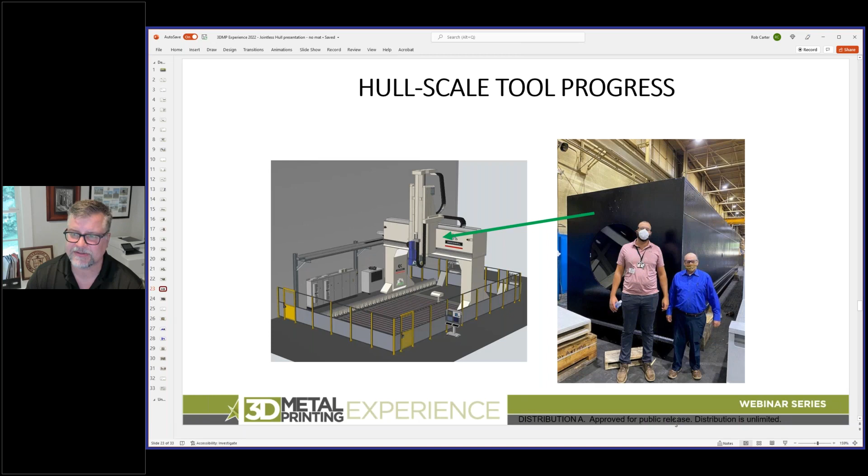And as of March earlier this year, you can see at least the crossbeam had been installed. I'm 6'2", that's me in the background right there. So this thing is enormous. So very exciting. It's starting to take shape as it has to, because it's going to be installed later this year. Very exciting from that perspective.

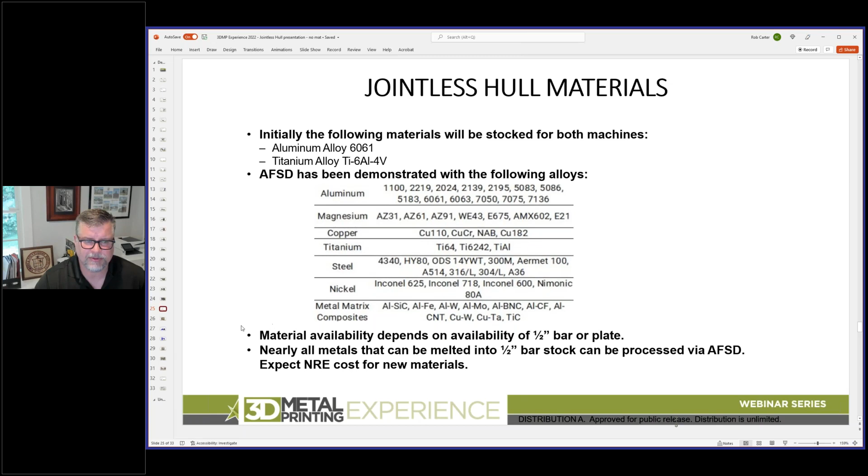So as I mentioned earlier, for the different material systems out there, MELD has been shown to process two of the primary materials of interest, your 6,000 and 7,000 aluminums and your titaniums, but they've already covered numerous families: your 1, 2, 5, 6, and 7,000 series, magnesium, copper, titanium, a number of different steels, nickel-based materials, and even some metal matrix composites have been processed with additive friction stir. Basically, as I said earlier, it depends on if you can get it in half-inch bar stock. So that provides a lot easier supply to feed the system.

All right, well, I wouldn't do much for additive if I only talked about a machine that's going to be built later on this year. So one of the things we wanted to look into to demonstrate the technology is a tank hatch demonstration. So you can see here on a fighting vehicle, you should imagine a fairly robust hatch to protect the occupants. What we'll say is this was a hatch derived from an existing design, so it's unclassified.

How they make these traditionally, it is actually machined from a forged block. So you would end up forging out a massive chunk of metal and then machining the part out from there. So this is print to near net shape, machine to finish. So process, none of this was optimized for this example, but we wanted to showcase and demonstrate the capability of the systems and the approach.

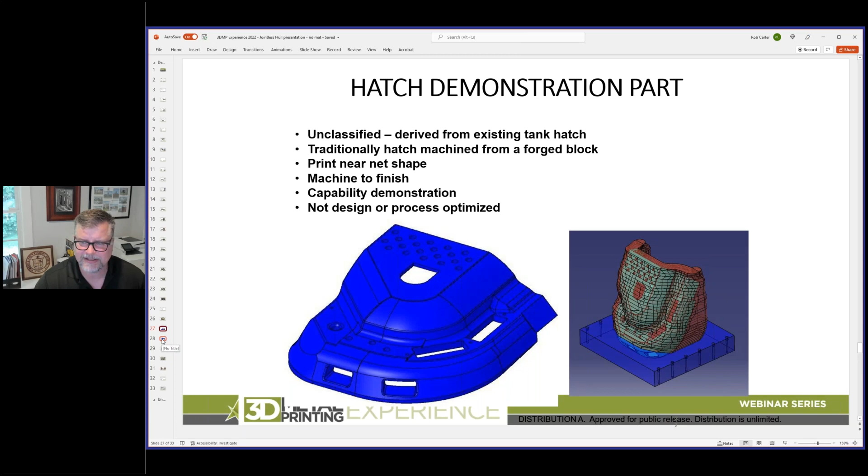So you can see here is a computer version of what the drawing of the part is, and we'll get into this in a minute here, but this is where the print of the part is, and then where that CAD drawing exists inside the deposit. So as I mentioned, this is a rather big piece of metal, 33 inches by 30 by about 10 inches. So a pretty robust chunk of aluminum.

And what would end up happening, and unfortunately I couldn't get my video of this to show, they were able to just build it onto a block of material. So again, this is being smart. Now you don't have to deposit everything if you can print it onto a substrate and then carve up the substrate. So you're using your build plate basically as part of the component. So you can see here is the deposit. You can see all the different layers from the MELD process.

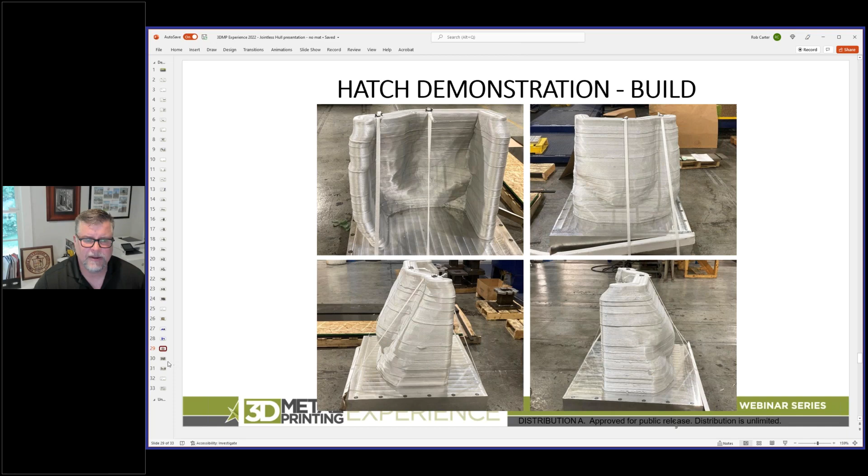And then the multi-pass as you machine it out, and as this suddenly goes from a kind of weird looking chunk of metal to a now very much visible hatch. As a result of this, we were able to get this out to AMUG earlier this year, where it won first place in the technical competition. So here are some finished pictures of the hatch, both front and back. So from that standpoint, we're pretty excited about the technology moving forward and also looking into developing larger components.

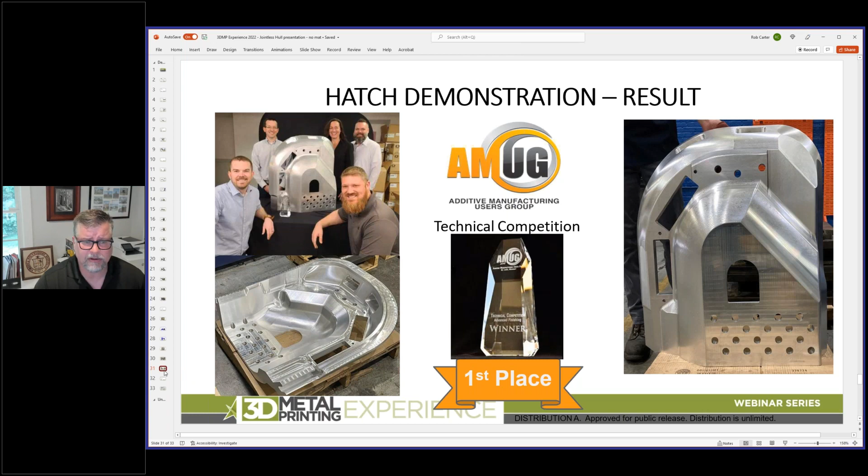So with that, one of the things that was a question in the last talk was, can you work with us on this? Can people gain access to this machine? The answer is yes. We are looking for people with ideas of parts. What would you like to build with this? We are wanting to make sure that this system is well used, especially with defense applications, but there are other opportunities that we would entertain.

So if you have a part name, a part size, a material type, some of this different information, this team will be able to reach out to you, discuss it with you, see if it's a suitable candidate for being included. And then we can work on seeing how this partnership can grow.